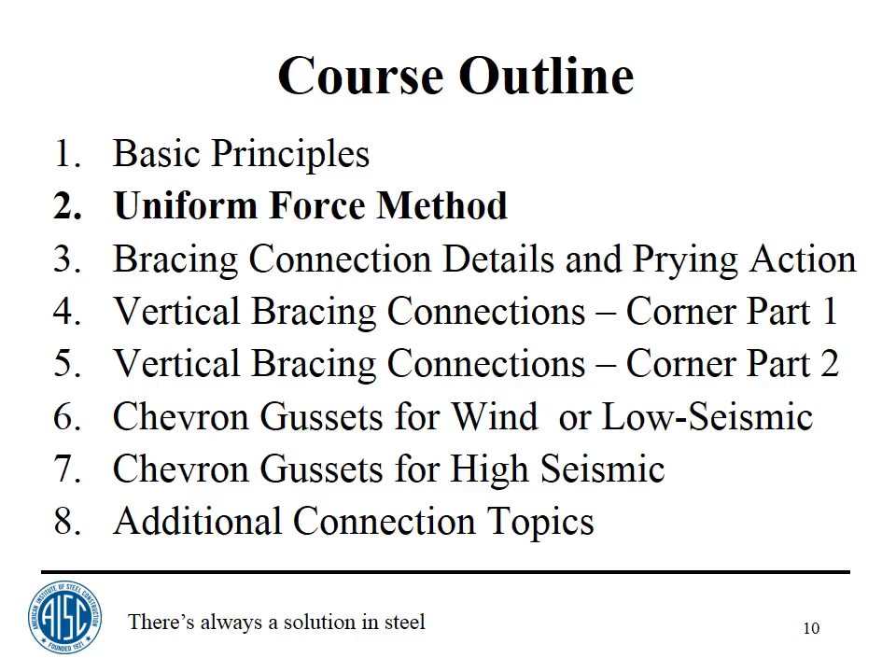In subsequent presentations we'll look at bracing connections and details. That's next week, or 2 weeks actually from tonight. Then we'll look at some corner connections, some non-seismic and seismic. Those will be sessions 4 and 5, and then chevron gussets for 6 and 7, non-seismic and seismic, and then we'll finish up with some additional topics. Some of them are probably still up in the air, but maybe development of fills and gussets coming down to base plates and that sort of thing.

Tonight's session will cover all of the items you see here: the uniform force method and all the things associated with it - the geometry, control points, admissible force field. We defined that last week, but we'll talk about it again. We'll do the beginning of a small example, which will also be done in session 4. We'll look at special cases 1, 2, and 3, and special case 4, which is a new one. The research basis for the uniform force method - depending on how much time we have, we'll get into an orthogonal development for the uniform force method and then do a couple more examples and a summary.

The uniform force method, what is it? It's a geometric method to determine the statically indeterminate force distribution in a vertical bracing connection. The method evolved from research sponsored by AISC, performed by Ralph Richard at the University of Arizona back in the mid-'80s.

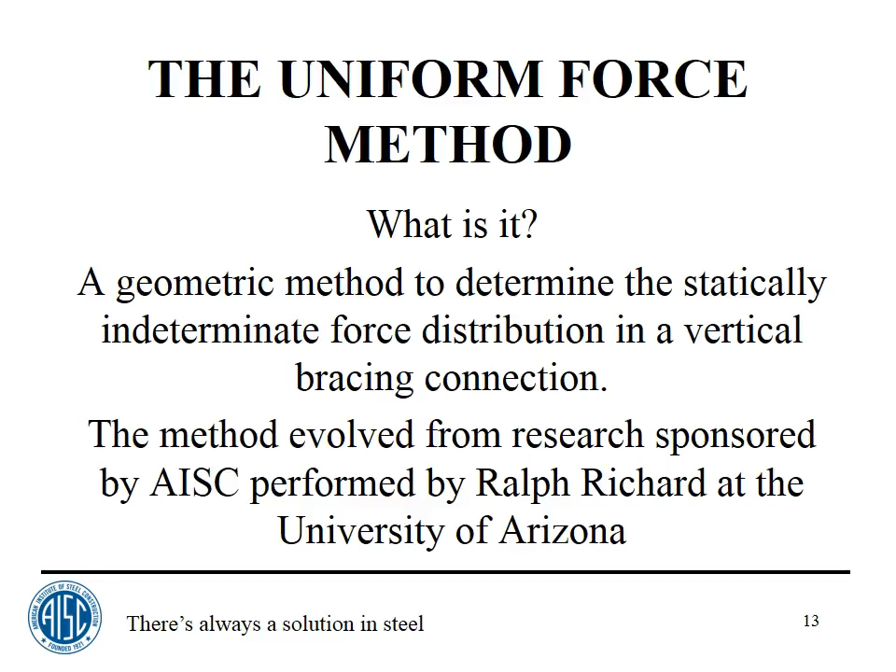And what about an admissible force field - an admissible force field is an internal force distribution in equilibrium with the applied forces. That's basically all it is. We need to do free body diagrams for all parts of our connection, just as we have to have them for all parts of our structure. The load path that actually develops is intimately associated with the admissible force field that you choose. Last week we saw admissible force fields that were generated by three methods that exist out in the industry today: the parallel force method, the KISS method, and the uniform force method.

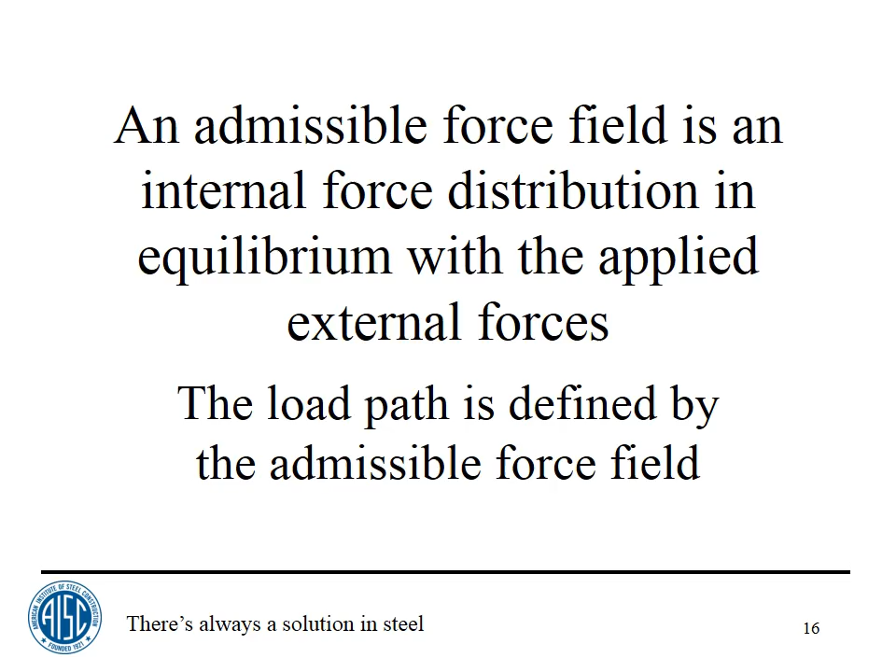Today, and for the rest of this webinar, we will be talking about only one of those three: the uniform force method. The control point geometry, which we'll discuss shortly, is dictated by the constraint.

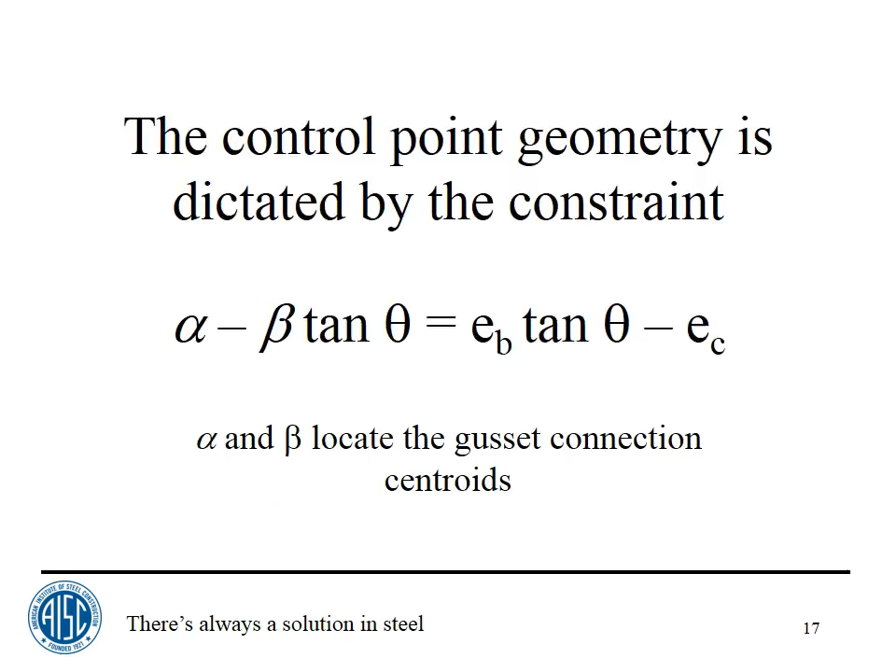Alpha minus beta tangent theta equals E sub B tangent theta minus E sub C. Alpha and beta locate the gusset connection centroids. Sometimes you'll see in some of these slides another set of quantities, alpha bar and beta bar.

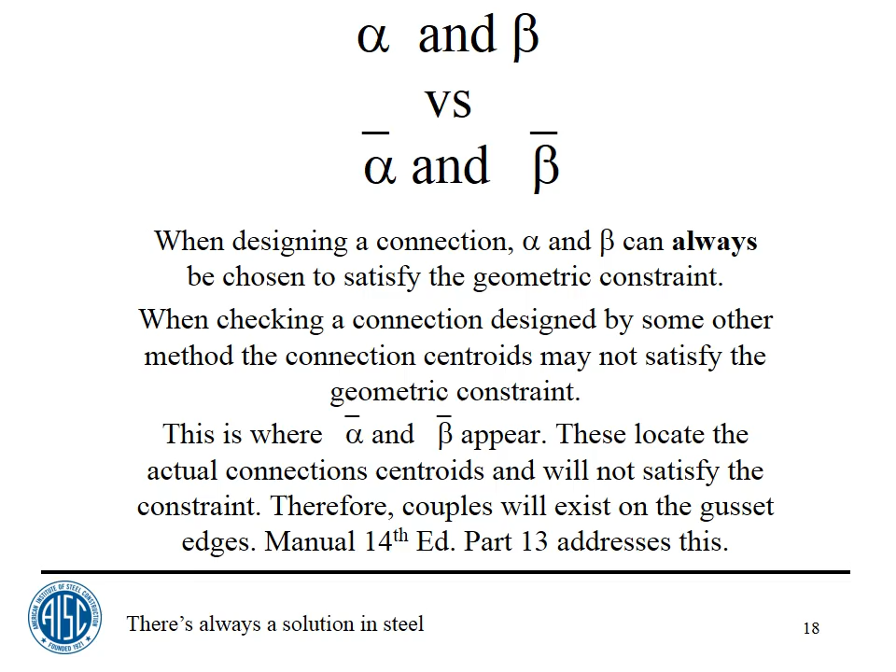When designing a connection, alpha and beta can always be chosen to satisfy the geometric constraint. When checking a connection designed by some other method, the connection centroids may not satisfy the geometric constraint, and this is where alpha bar and beta bar appear. These would be the actual connection centroids, and will not necessarily satisfy the constraint. If that happens, instead of having a nice concurrent or coincident set of forces on your gusset, you'll have some couples—all of the forces do not act at a single point unless you satisfy the constraint.

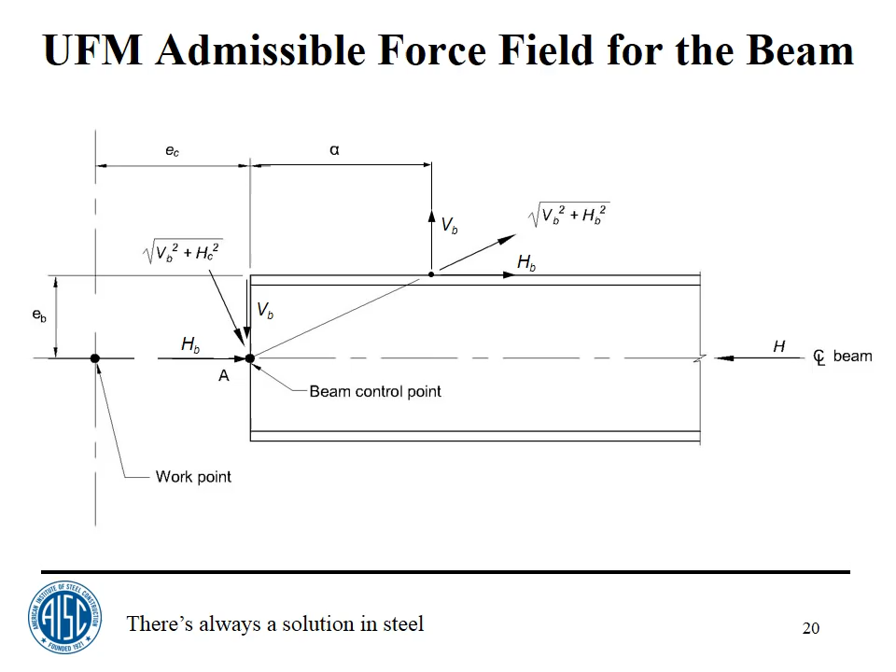These slides show the control points. Control point A is the beam control point. Control point B is the column control point. These are really fundamental to the development of the uniform force method.

These are the equations of those three straight lines. For equation 1, y equals 1 over the tangent of theta, times x. For the equation for the beam force line of action, it's y equals E sub b over alpha, which is its slope, times x, minus the y-intercept, which is E sub b over alpha, times E sub c. And the equation for the gusset to column force line of action: y equals beta over E sub c, which is a slope, times x, plus the y-intercept, which is E sub b. These are the three equations.

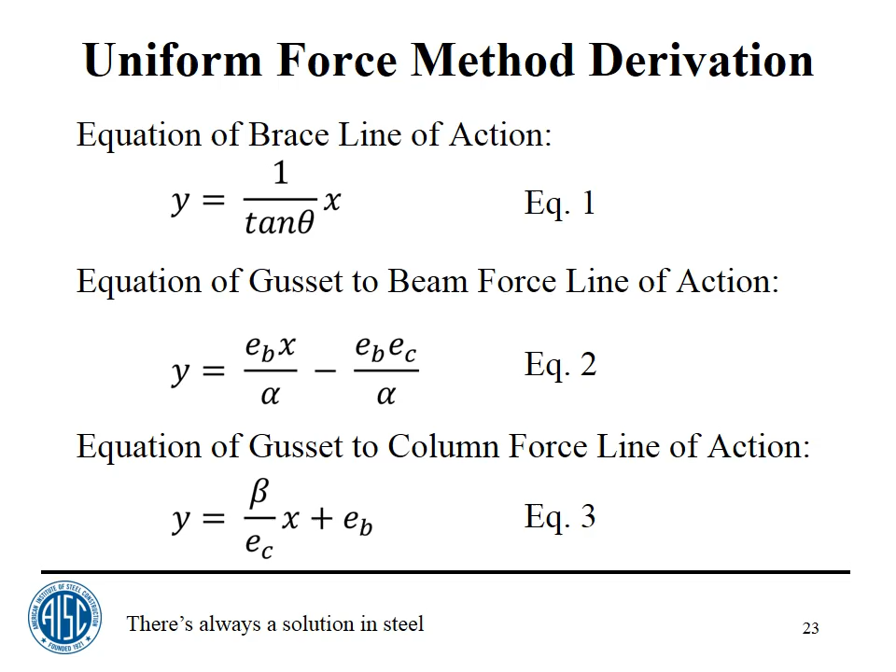If I take those three equations, 1, 2, and 3, and solve them to find point Q: take equation 1 and equation 2, set them equal, and solve for x sub q, that gives equation 4. Take equation 1 and set it equal to equation 3, and solve for x sub q, that gives equation 5. Now I've got two equations for x sub q, and x sub q given by these two equations must be equal.

So, setting equation 4 equal to equation 5, we get what you see on this slide. Simplifying that, you'll see a very familiar equation if you've used the uniform force method. The constraint comes out of the hat here: alpha minus beta tangent theta equals E sub b tangent theta minus E sub c. To satisfy the geometry of the uniform force method, the equality given by equation 6 must be satisfied.

I think this is the first time I've formally presented this derivation, but it was first done a long time ago in 1985 at the Ionosphere Club of Eastern Airlines, which has been out of business for a few years since. My flight was delayed, and I just couldn't stand not working on this problem. Finally I got something that worked that I could hang my hat on.

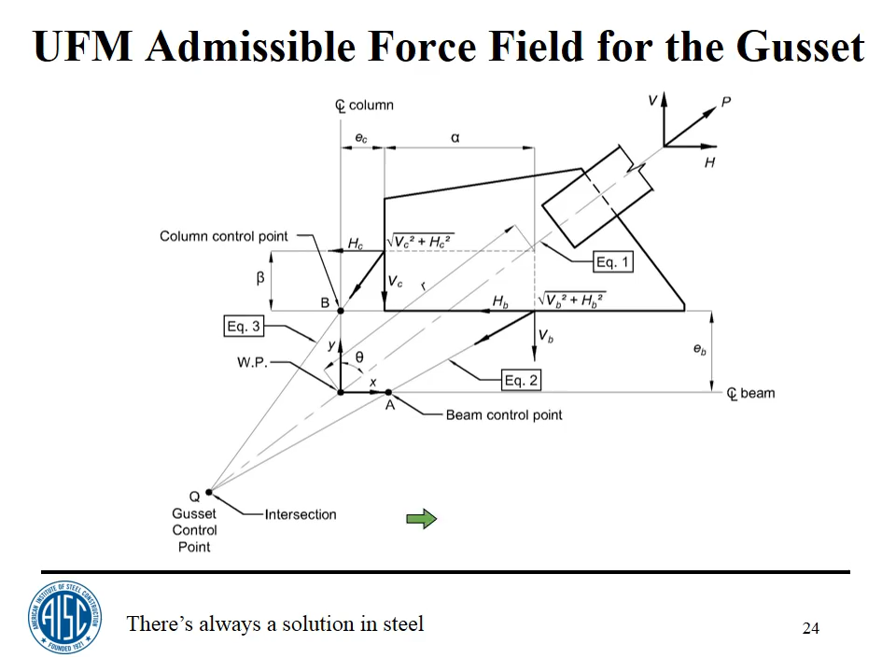The R here is a parameter I forgot to mention on an earlier slide, but it's a distance. Let's go back a couple of slides and show what R is. It's just a geometric parameter: the distance from the work point to the point where a vertical raised from the centroid of the gusset at alpha meets the horizontal projected from the centroid of the gusset column connection. Where they meet, the distance from that point to the working point is R. It's just the geometric part of the uniform force method, and using it makes the final equations pretty simple, as shown on this slide.

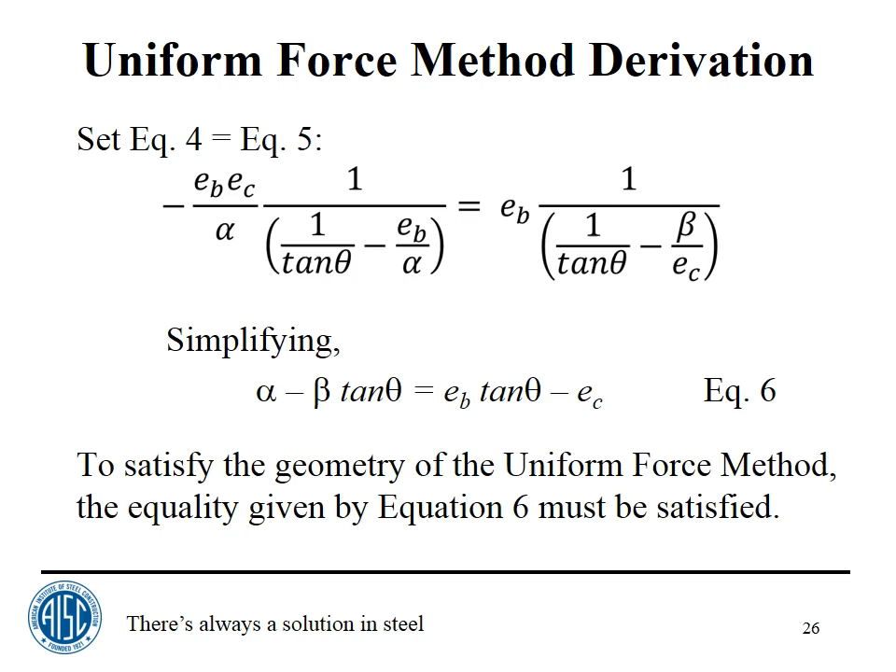This is some of the data. We're doing this to the 14th edition, and it's an ASD example. The beam to column and gusset to column connections have 4 rows of bolts. That's what the little n equals 4 means.

The length of the weld was taken as 20 inches with a 1/4 inch minimum fillet. In this case, we're using 3/4 inch diameter A325N bolts in standard holes, unless noted otherwise. And for double angles, we're using horizontal short slots.

Short slots transverse to the direction of the load. They're actually horizontal in the legs that connect to the column. The edge distance in the vertical direction is 1.25 inches minimum, and the bolt spacing is 3 inches.

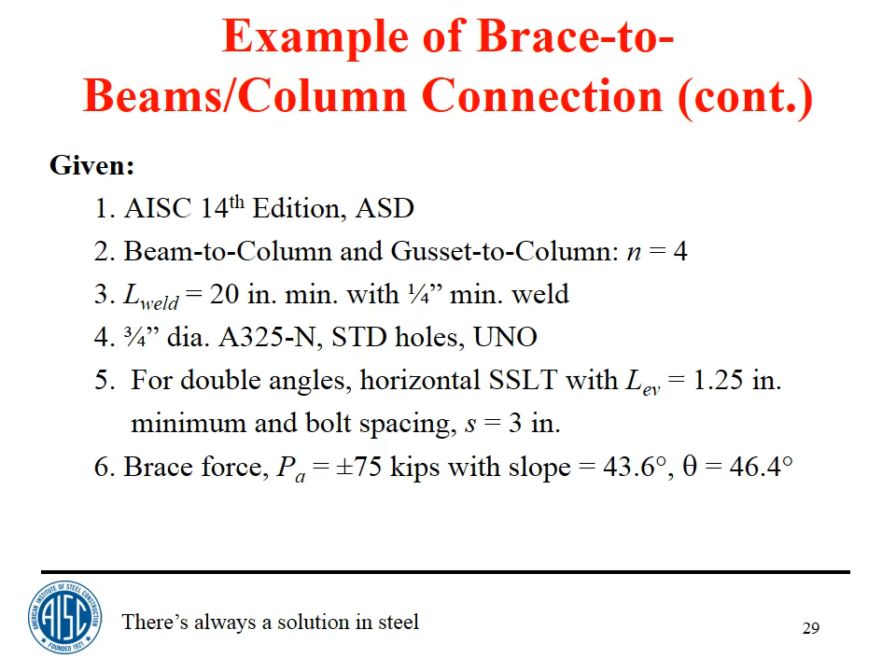So continuing with the parameters, you'd calculate tangent theta, which is the tangent of the angle, 46.4 degrees. E sub B is the half depth of the beam, 8.2. E sub C is the half depth of the column, 6.05. E sub C is equal to 0 for connections into column webs generally, except for this special case 4 that you'll see later on today.

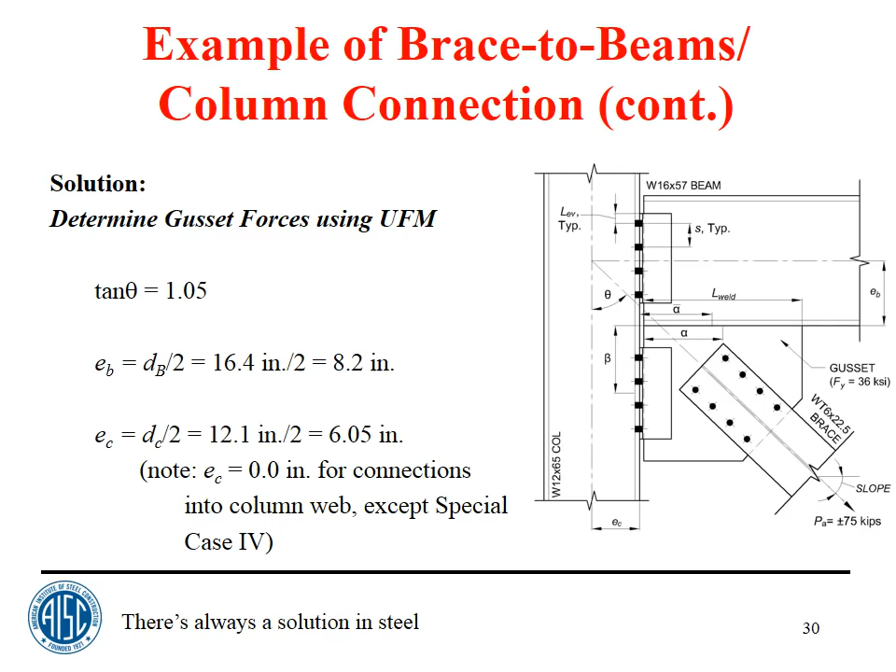Calculating from the geometric layout, the height of the gusset is about 16 7/8 inches. That's this distance here, and in this particular example, this clip angle was centered on that, which gives me a beta bar, more or less centered, equal to beta of 8.5 inches. That's 8.5 inches from the bottom flange of the beam to the centroid of the gusset to column connection. Alpha, then, we can calculate from the constraint.

Alpha equals E sub B tangent theta plus beta tangent theta minus E sub C. So it's 8.2 times 1.05, that's the tangent of theta, minus 6.05, which is E sub C, plus beta, which is 8.5 times tangent theta, 1.05, gives me 11.5.

Now you might say, well, why didn't we make alpha and alpha bar equal? We could have, but the reason it's not done here is just to show you how it works. Alpha bar, in this particular case, is half the length of the weld plus the setback. The length of the weld was given as 20 inches over 2, gives me 10, plus a half gives me 10.5.

Now alpha itself was 11.5. So all I really need to do is say, I don't want to use 20 inches for the weld here. How about if I use 22? If I use 22 inches, 22 over 2 is 11, plus 0.5 gives me exactly what alpha is, 11.5. It wasn't done in this case just to show you that you don't need to do it that way.

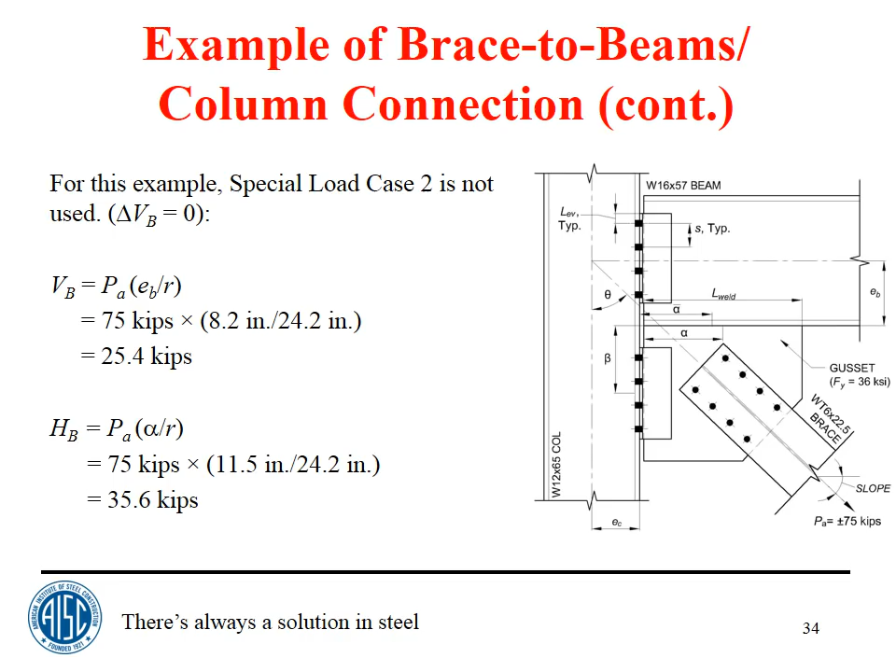If you do that, when you come to check the V sub B's and the addition of the V sub B's and V sub C's and the H sub C's and H sub B's, you won't get the cosine of 75 for the vertical and the sine of 75 for the horizontal. So you'll know right away that you've screwed up someplace.

So we've done all that. M sub C would be a couple on the horizontal edge, the vertical edge between the gusset and the column. But in this particular case, beta equals beta bar, so it will be 0. You could have couples on both edges.

And if you have a situation where the gusset is welded to both the beam and the column, how do you decide which one to pick? Which one should be beta? Should beta equal beta bar, or should alpha equal alpha bar? Really, there's no answer to that question.

Usually, we pick beta equal beta bar for the bolted connection because it's difficult to carry any couples or moments on bolted connections, especially with double clips like this, because you've got prying action and all that to deal with. Whereas the weld is really pretty benign relative to any couple on it, provided it isn't too big.

So usually, and I think it's pretty much universal, whenever you have a welded-bolted situation, you always pick the centroid of the bolted connection and set that equal to beta. That's therefore beta equals beta bar. And let alpha turn out to be what it needs to be to come up with reasonable geometry for your gusset.

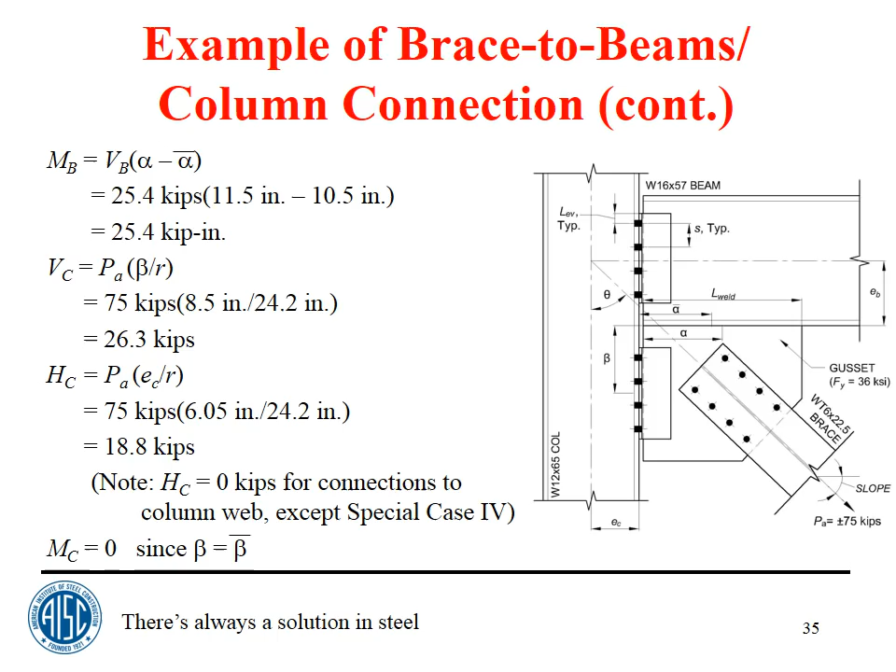Okay, and then I have a couple questions. I'm going to go back to slide 28. Okay, I've got it, Bill. I've got it there. All right, there we go.

Okay, a couple questions about combining welds and bolted connections. And the question is, does there need to be any adjustment made due to the fact that the gusset plate is welded to the flange of the beam, but we're bolted to the column?

I don't think so. The connection that's probably critical in that regard is the gusset-to-column connection and the beam-to-column connection. If one of those is bolted, the other one should be bolted too most of the time. There's no specific requirement for that in the specifications. You could argue that there is, but I don't think it really covers it exactly. In the seismic spec, there's an absolute requirement for certain kinds of bracing connections that you use bolted or welded. But the other one, the gusset to beam, I don't see why that has anything to do with it. There's no reason why the deformation, the strain that takes place in the gusset-to-column connection and that takes place in the beam-to-column connection, can't be essentially the same.

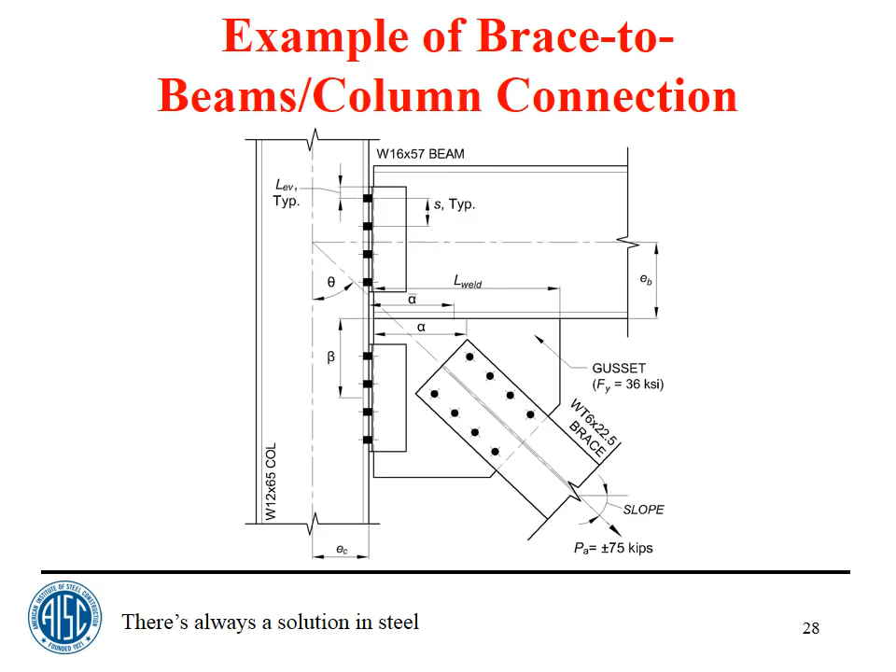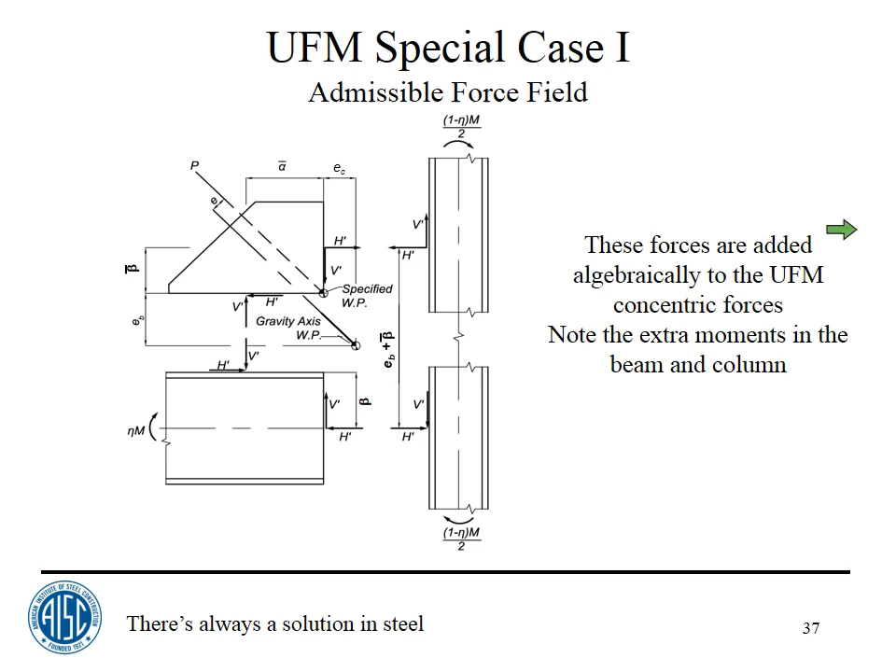So for this type of situation, we can come up with a statically admissible internal force distribution for the connection by taking the H primes and V primes shown here and adding them algebraically to the uniform force method forces you'd get by assuming the brace acts through the gravity line of action for the uniform force method. You come up with a completely admissible internal force field. However, you've got these couples in your beam and column, so the design of the beam and column need to consider those couples if you want to satisfy the niceties of structural mechanics.

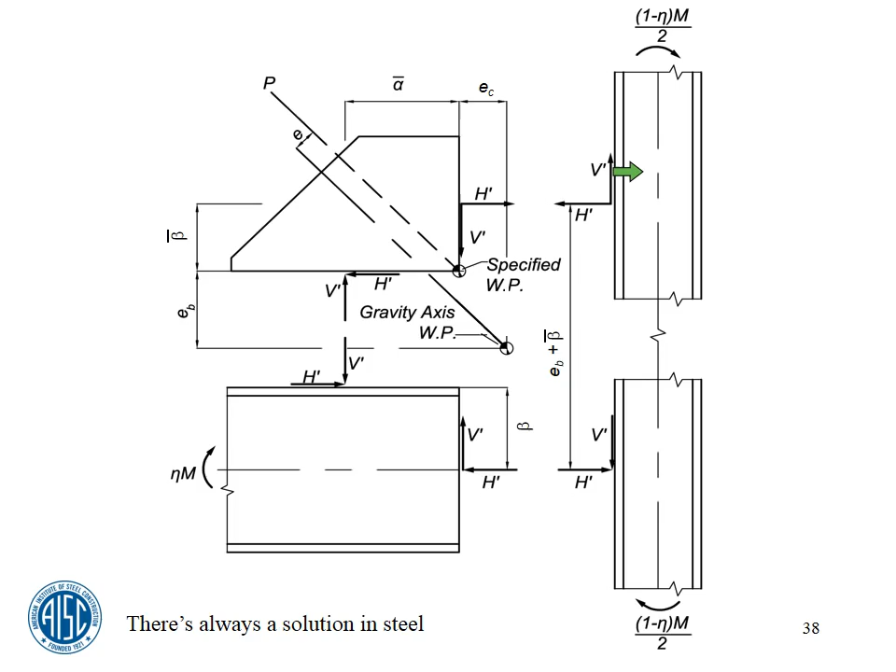You could check it and see whether it really makes any difference or not — sometimes it does, sometimes it doesn't. What's eta? These are the formulas to calculate H prime and V prime, basically gotten from statics, from the pictures you see here.

And eta — if you have an elastic analysis, it would be the I over L of the beam divided by the sum of the I over L's of the beam and the column. That's for elastic analysis, or maybe you want to do some sort of plastic analysis, looking at the plastic moment of the beam and the sum of the plastic moments. I don't know the right way to do this. If you're using an elastic analysis for your main frame design, I'd say the I over L approach is right. If you're doing an inelastic analysis of this particular problem, then maybe something like the plastic moment approach is more appropriate.

Special case 2, we alluded to that in the example that we saw. Sometimes we get too much shear in the beam. This R is a specified beam shear. And if R is taken as some percentage of UDL, what's UDL? The uniform design load. It's the design load that fully stresses this beam at the center under a uniform load.

A lot of people use this as a crutch rather than giving the connection design of the actual beam gravity shear. They might specify 1/2 UDL or 3/4 UDL or UDL at each end, say a composite situation. That really gets the shear stress in this beam web pretty darn close to what it can take.

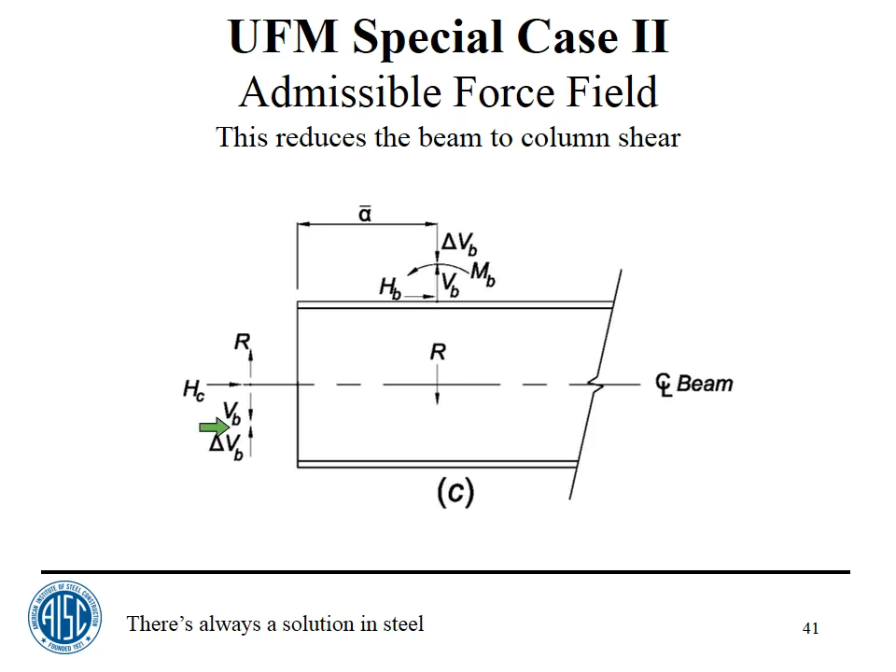If the gusset were down here on the bottom flange of this beam, say in the fourth quadrant, and the brace was in tension, then they would add. So even though they're shown this way, and they're shown this way intentionally just to show the way they really act, you can't be sure that they're always going to be acting in those directions.

This just shows you what happens if you do this. If we add a delta V sub B here, which we're reducing the vertical component between the gusset and the beam, we've got to increase the vertical component between the gusset and the column. So you have a delta V sub B over here that adds to V sub C. So V sub C gets bigger. And what happens now, we've got a delta V sub B here and a delta V sub B there.

These are causing a counterclockwise couple on the gusset, and it needs to be reacted by a clockwise couple, which is V sub B times, if the alpha and the alpha bar are the same, that term goes away. It's delta V sub B times alpha bar, the distance between the two delta V sub B's, one here at the centroid of the gusset to beam connection, and another one here at the centroid of the gusset to column connection. If alpha and alpha bar are not the same, then we have this extra term that you see here, V sub B times the quantity alpha minus alpha bar.

All of these equations are given in part 13 of the manual, the 13th or the 14th, or even all the way back to, I believe, the second edition, and definitely the third edition, LRFD.

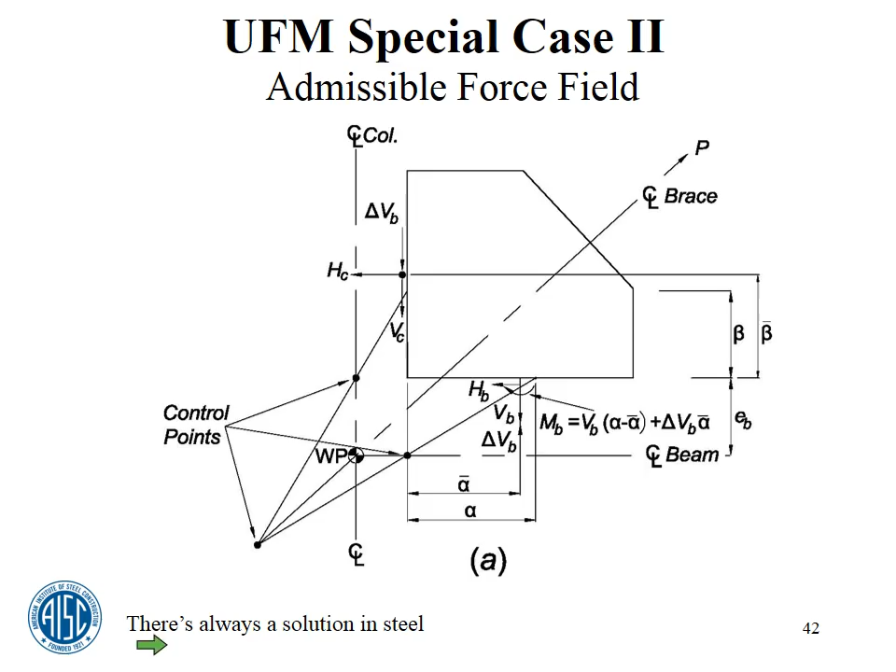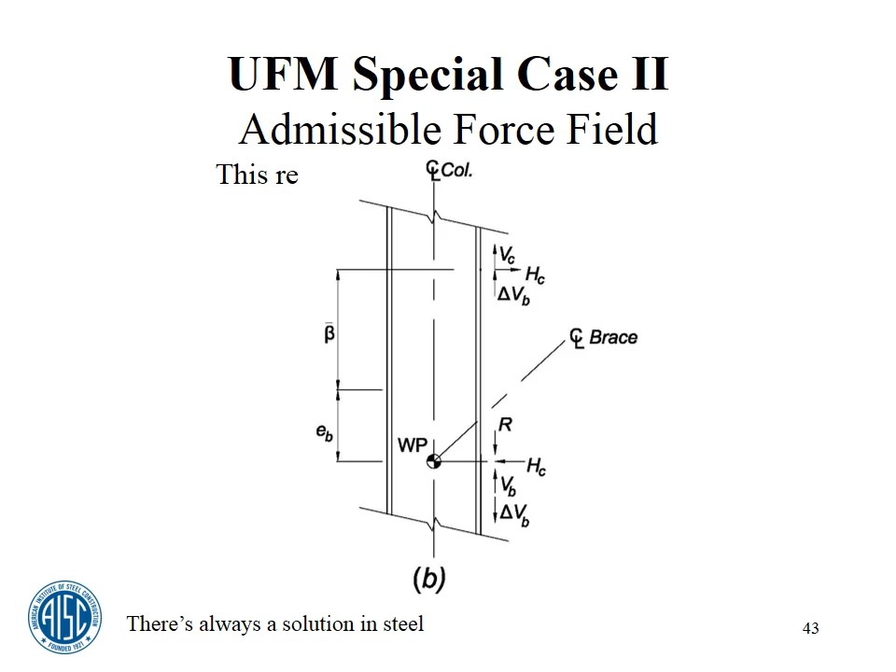So this just shows you what happens with the column. The third one of the three free body diagrams, we've got a delta V sub B that's pulling down here, and we've got another one that's pushing back up here. So these basically cancel each other out and have no effect whatsoever on the column. They do affect the gusset, though, and they affect the beam.

What causes the use of this? Well, I really told you what causes it. If you insist on using some percentage of the strength of the beam, some percentage of UDL, the uniform design load, you are going to be basing your shear reactions on a beam strength rather than on floor loads. Most beams, especially those part of the lateral bracing system, are designed for stiffness, not strength.

Check out your designs. Usually you're going to be designing these beams for at least a deflection limit, and you may have an axial force in it because of the bracing situation. These beams are going to be heavier than they need to be just to carry the gravity loads on the floor. This results in beams many times stronger than those required for strength, and larger shear reactions than those required for floor loads. Check one of your designs.

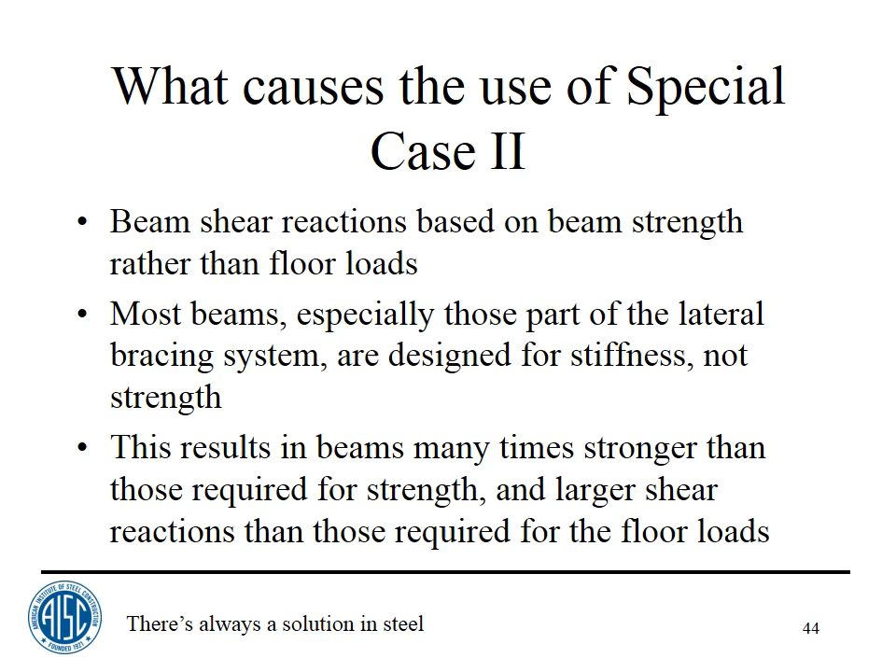Engineers listening to this, if you use UDL or 3/4 UDL or whatever, calculate the load you actually are using in pounds per square foot on the tributary area that contributes to that beam, and I bet you'd be surprised. You're probably talking about 1,000, 2,000 pounds per square foot, when the real load is probably more like 200. If the real gravity loads were used based on the loads rather than the beam strength, we probably would never have to use special case 2. And I don't really like special case 2, but sometimes we have to do it to avoid doubler plates, which are expensive.

Special case 3 is spelled out in manual part 13. Basically, it's what you would do if you got a very shallow brace or a very steep brace. This shows a shallow brace with a large angle theta from the vertical. Why connect to the beam and the column? Just connect to the beam in this case. And if you had a very steep brace, connect to the column. That's really all special case 3 is.

These are all the formulas. You can look this up in manual part 13. This blows up what you saw before. In the previous one, you could use a flat bar in here, which means very little fabrication, depending on if you can make it work. If you've got a big nose over here, it might turn out that you're not passing too close to the centroid of this thing.

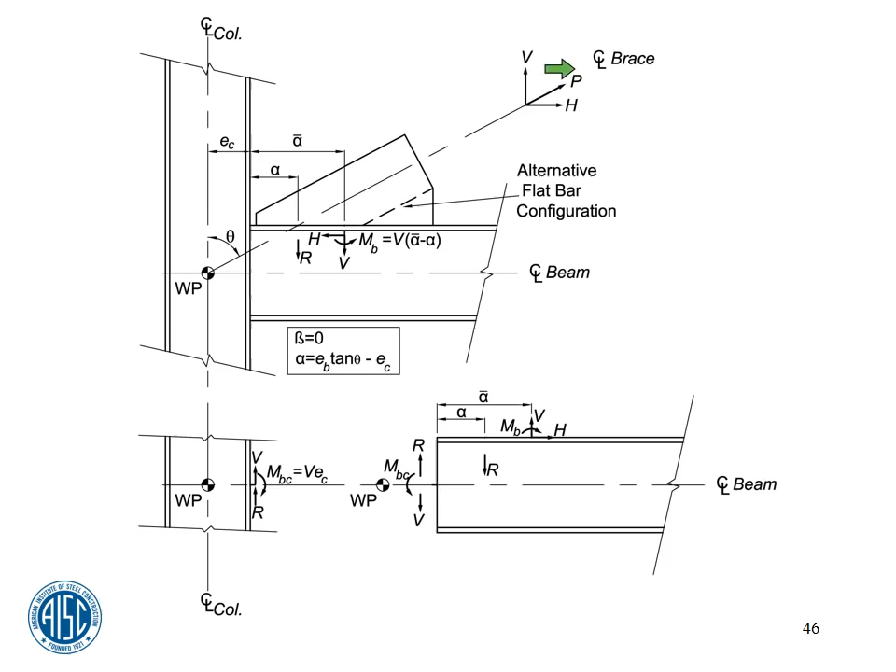Ideally, we should have alpha bar equal to alpha, but because of the geometry, you won't always do that. Note that one of the problems with this connection is MBC here. There's always going to be a moment between your beam and your column if you do this. That means this connection down here is going to be hurt quite a bit by a couple. There's nothing you can do about it, because I need to bring the vertical component over to the center of the column, and that's really what this couple is doing.

Now, special case 4, which the next set of slides will cover. This is something new. The name was actually coined just a few days ago by one of the people helping AISC produce the slides for this presentation. Basically what it does is it takes a connection to a column web but makes it look like it's to a column flange.

By taking an E sub C equal to the distance out, say, to the first column of bolts as the usual case. I could take it out to the second, or if I had a double column of bolts, I could go to the center of those. The idea is that the uniform force method, the mathematics, doesn't know whether this is a column web or a column flange, so we could kind of fake it out. We can just use E sub C, giving E sub C equal to the distance out to the first column of bolts rather than 0. It's turned out in a lot of jobs that gives us a much more economical connection.

This slide just shows you all the forces that you're going to generate using the usual uniform force method with an E sub B and an E sub C. You might take beta equal to the distance down to the centroid of the gusset-to-column connection. If you do that, and that's what we usually do, you're going to calculate an alpha, and it almost always turns out to be bigger than alpha bar. So you're going to have a couple on this horizontal edge here. We could move this brace out, we could make the gusset longer, but why bother? It's just more economical generally to allow a couple to exist on these interfaces sometimes.

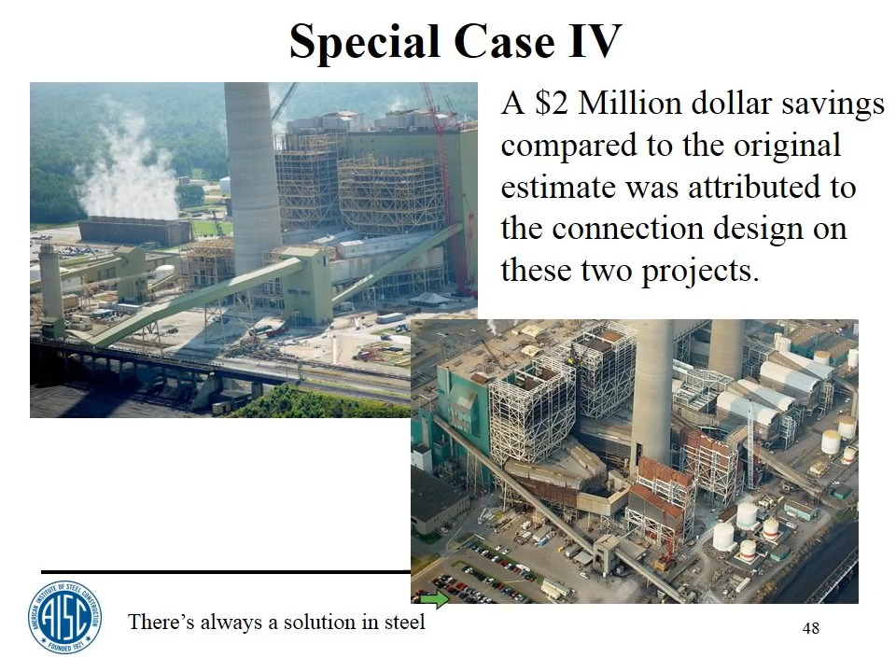They used the KISS method. They used double clips. We used the uniform force method, and Special Case 4, among other things. We used conventional and extended tabs. They replaced the more traditional double clips at jumbo columns, reducing both fabrication and erection costs.

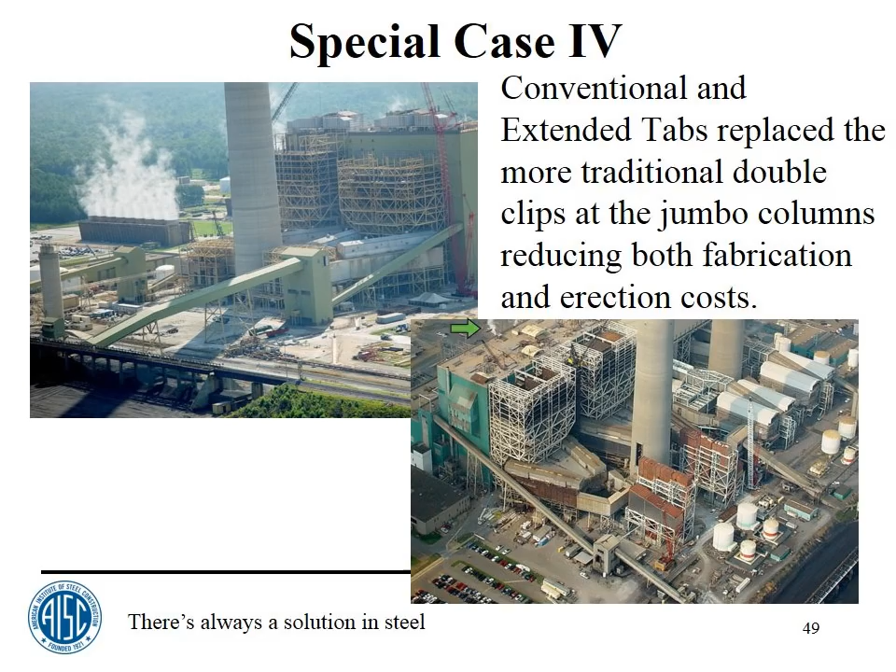Imagine drilling all those holes in columns that have 4-inch flanges. I mentioned that last week, too. So I'm not going to dwell on this too much.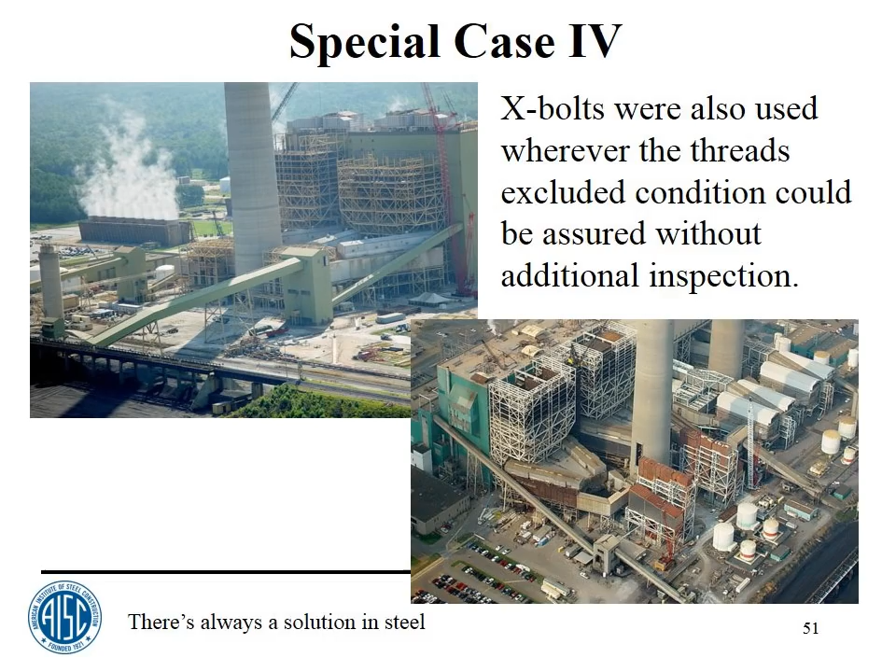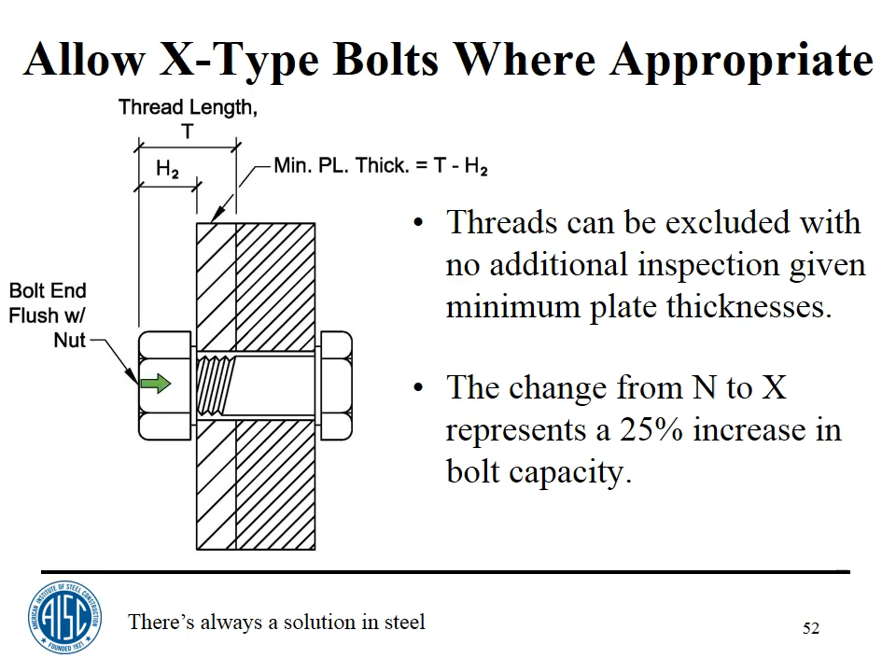But the uniform force method was used in novel ways. Basically, what we did is we used Special Case 4, and we used X bolts. A lot of people think that if you're going to use X bolts, you need additional inspection. But really, if the thickness of the ply adjacent to the nut satisfies certain requirements, as we'll see on the next slide, you may not need any extra inspection.

For instance, with 1-inch diameter bolts, if we have a flush nut, which is the minimum, and no washer, we'd need a ply next to the nut of about 5/8 to 7/8 of an inch. Probably 13/16 or something. But if I use a 5/32 washer, I can go down to about 5/8. And with a 1/4-inch stick through, I can go all the way down to about 3/8. So anything thicker than that, I won't have threads in the shear plane.

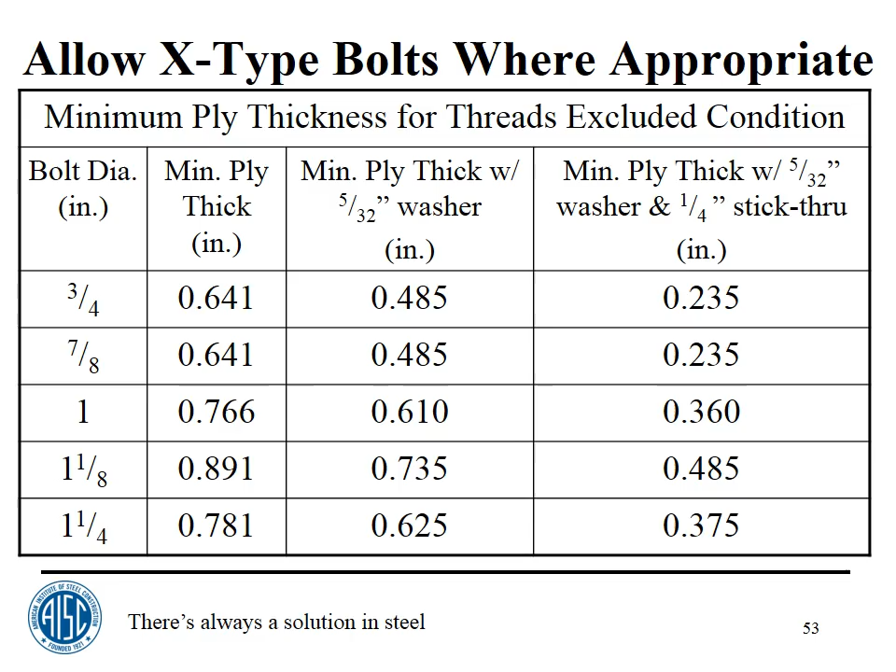So you can really use X bolts in a lot of cases, and we use them all over the place. If we have a connection to a column web, like you see here, or a thin web or thin plate, we use N-type because we don't want the extra inspection.

On this particular job, this is the Special Case 4 connection that was actually pulled off that power plant job you saw. We had a 16 by 26 beam, 3/4-inch diameter A325 bolts, and this is the actual design. And these are the force distributions.

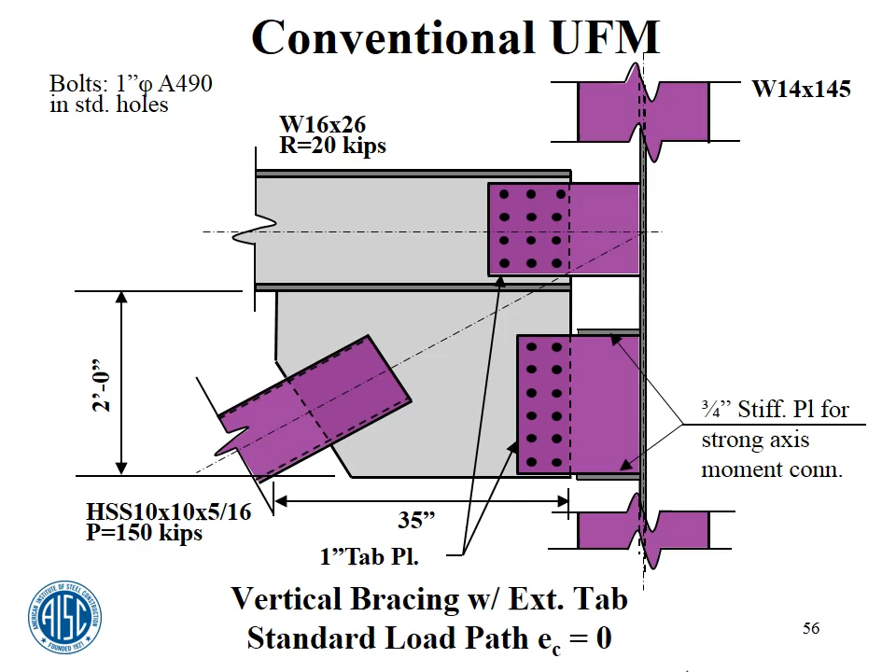We saw that before. This is using E sub C equals 10 1/4 inches. The conventional way to do this would be to use E sub C equals 0, and if you do that, you'll get this design. The next slide I'm going to dwell on a little bit more.

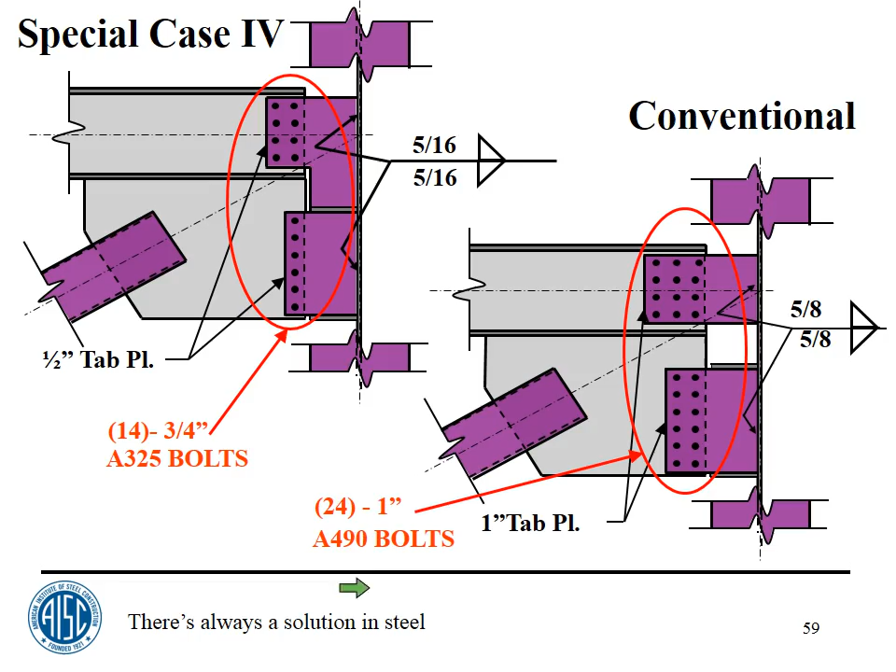We compared these two last week, the 1/2-inch tab and the 1-inch tab, and we compared the welds, 5/16 to 5/8, and we compared the bolts, 3/4 over here and 1 inch, but I think that's a mistake—those probably should be 7/8 bolts. But anyway, I don't want to dwell on that anymore.

These are the forces. If you calculate the forces on this—another homework problem for you—if you take the geometry you saw and go through the whole process, you should get the forces you see on this slide. This is what we used to design the one you saw with E sub C equals 10 1/4.

So I want to go through this table a bit more. We kind of glossed over it last time, but look at the holes. We got 24 in the standard as opposed to 14. We have plate thicknesses of 1 inch as opposed to 1/2 inch. The area of the holes here is for 7/8 diameter bolts as opposed to 3/4-inch bolts. We had 14.4 cubic inches as opposed to 3. We've got 21% of the volume. That means we're drilling only 21% of what we would have had to do.

The next one is instructive. For the standard case, we had 5/8 fillets; for the optimum, 5/16. The length of the standard was 30 inches as opposed to 52.3. Yet when we come over here, we see 180 inches. How come we had 30 and now we've got 180? Whereas for the 5/16, we've got 52.3 and we still have 52.3.

Well, the reason is that a 5/8 fillet weld is a 6-pass fillet weld. So if you take 30 times 6, you have the equivalent of 180 inches of single-pass weld, as opposed to the 5/16 at 52.3, which is a single-pass weld.

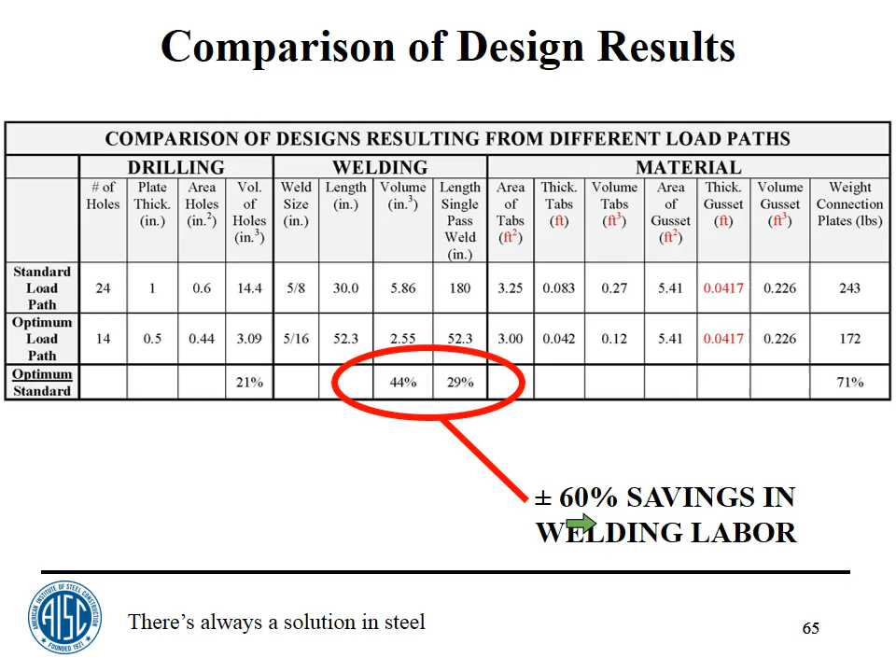Just looking at these numbers, we saved 80% in drilling time, and even more than that on the jumbo columns, because we use these tabs on jumbos as well as the light one you see here. We had about a 50% savings in welding consumables - I think it's actually more than that, but that was a reasonable estimate. And a 60% savings in labor - if you look at that 29, maybe we're talking about 70% instead of 60%.

And coming over here to the weight, it only weighs about 71% of what you would have had in the standard way of doing this.

You've seen 4 different cases here - actually you've seen 5. You've seen the general uniform force method, which is not one of the special cases. There's no special case 1, 2, 3, or 4 involved in that. So there's really 5 different cases that we've looked at.

So we've looked at how to use it. In the subsequent seminars, we'll look at design of a whole bunch of connections with this, or at least 2 in great detail anyway.

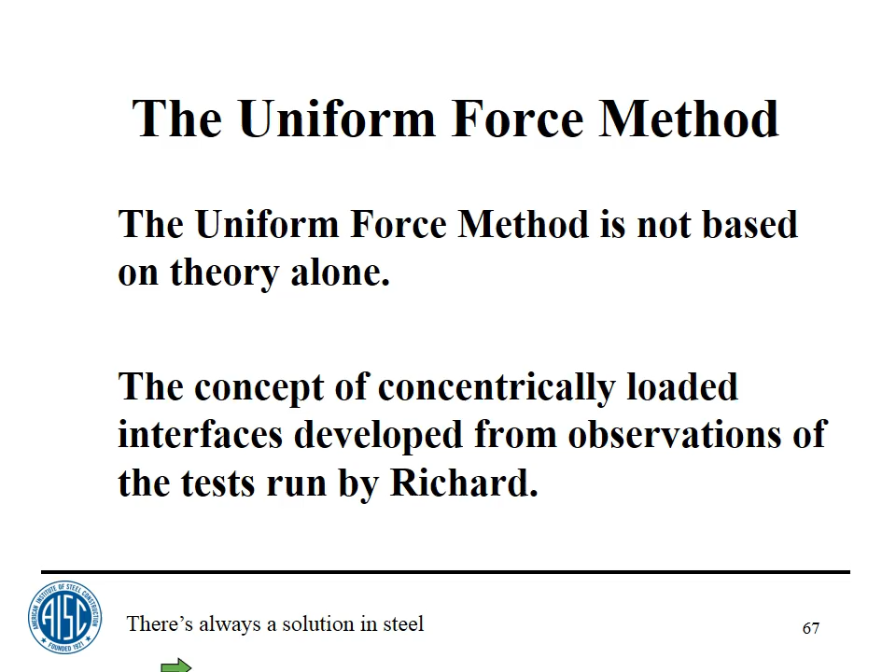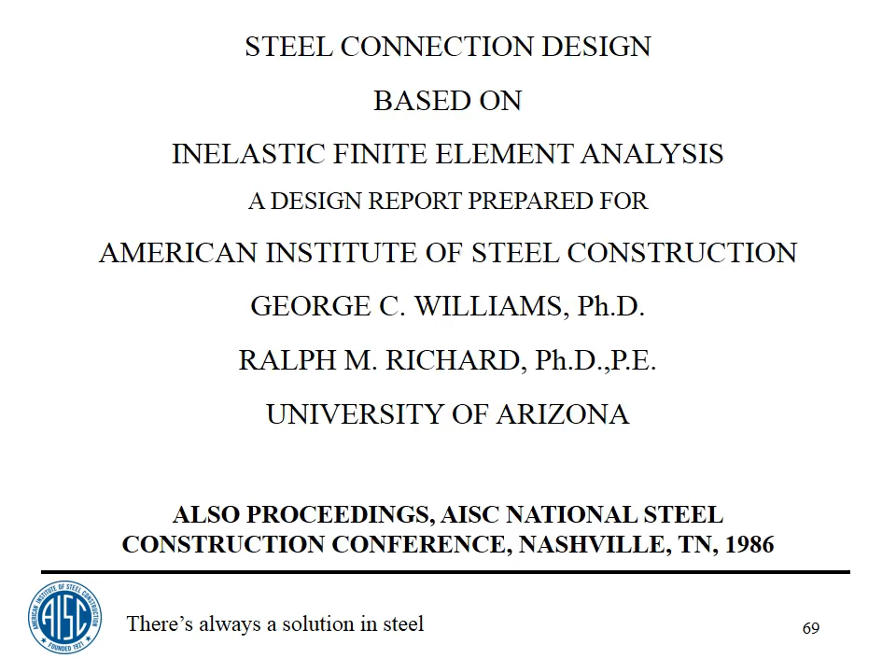The uniform force method, though, is not based on theory alone. It comes from work done by Ralph Richard, which was analytical, and it's also based on physical testing. This work by Ralph was analytical - he basically was using a nonlinear finite element program to solve problems that look like this.

You can go back to the paper I referenced on a previous slide, but he ran about 6 different cases. We started out looking at this with, say, welded on the horizontal edge and bolted on the vertical edge. Then we looked at bolted on this edge and welded on that edge. And then we looked at welded on both sides and bolted on both sides, and we didn't see a heck of a lot of difference. That's 4 cases right there.

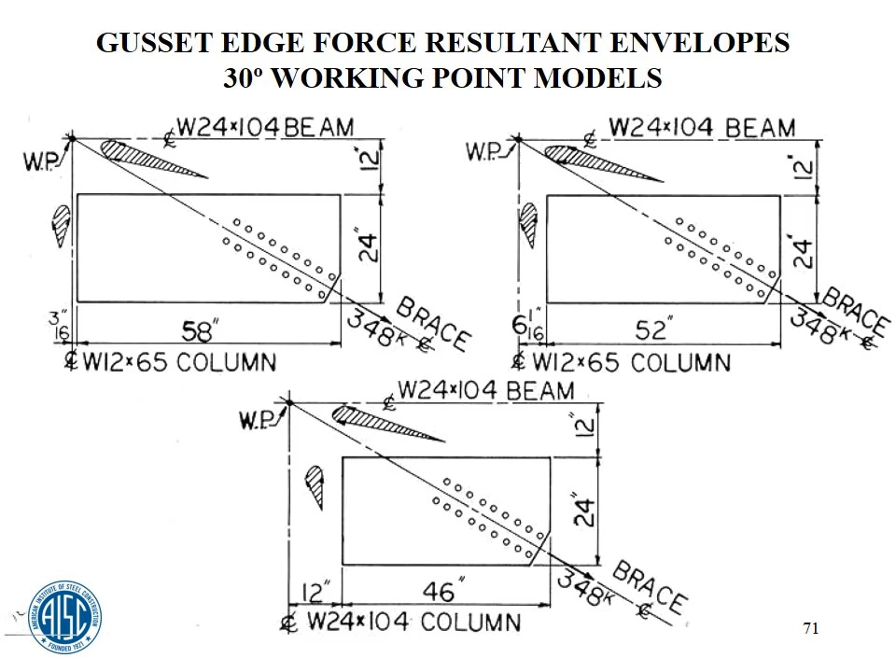Some of them really look pretty good, some not so good, but if you go back looking at the 45, they all looked pretty good at that one. Go back to this one, they all look pretty good. That gave me the idea, really, that maybe I can come up with some analytical way of representing this.

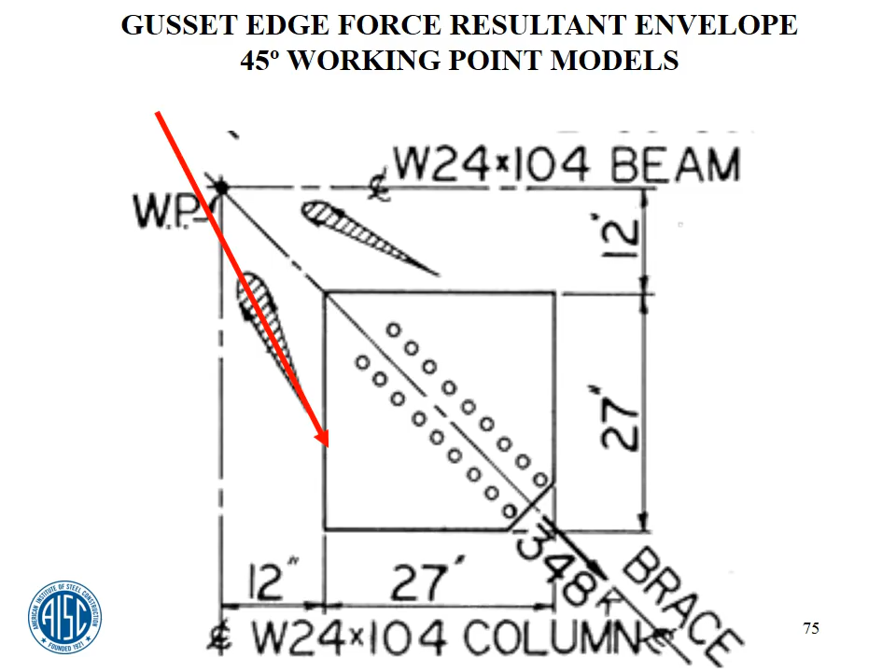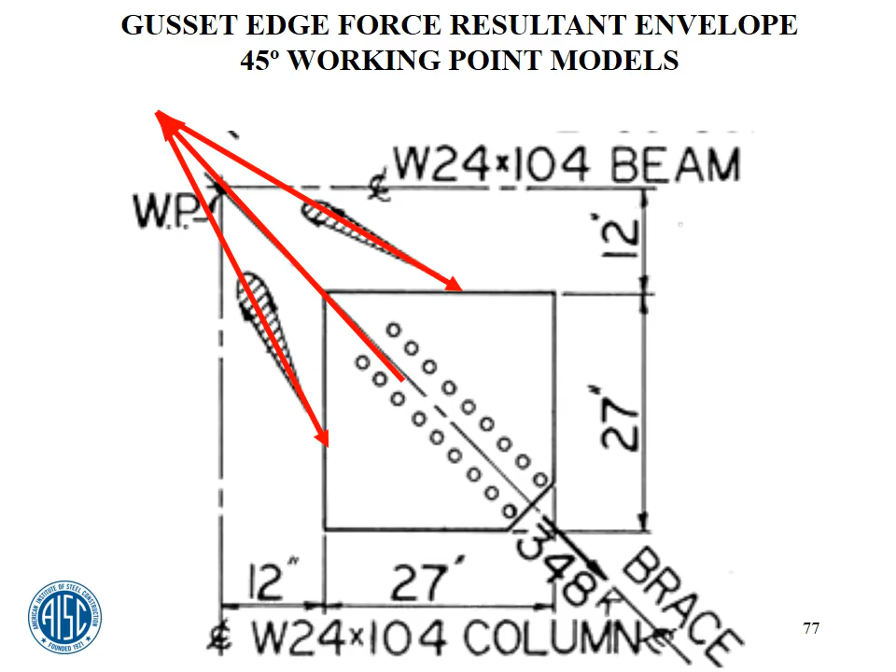Just looking at a 45-degree case, what if we extended, what if we put arrows through these teardrop-shaped regions that you see that go more or less to the center of the gusset, and you see they intersect each other on the opposite side of the gusset from the work point. That was the genesis of this idea, that I tried to come up with a kind of a non-fuzzy way to represent this.

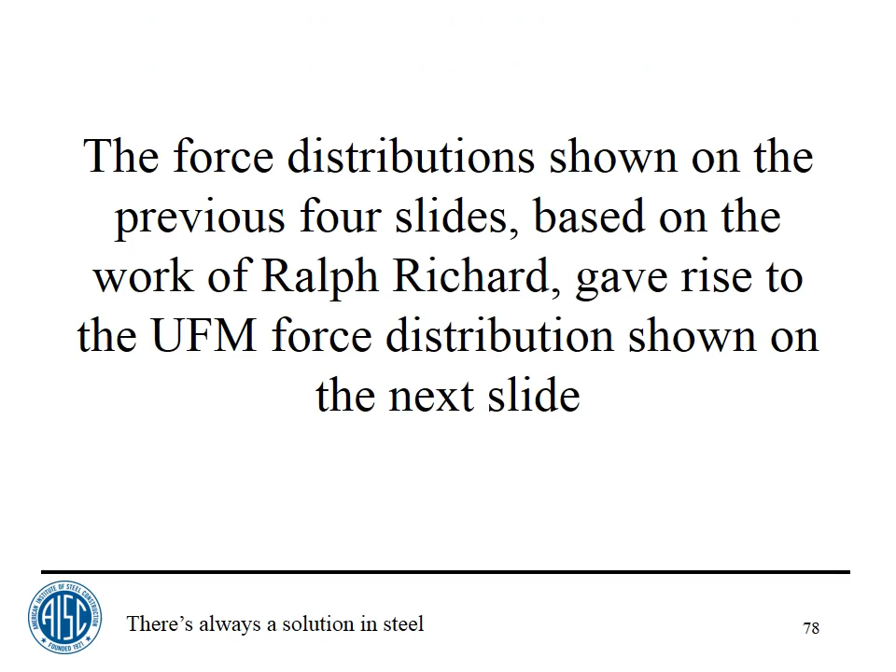So I say the force distribution shown on the previous 4 slides, based on the work of Ralph Richard, gave rise to the idea of a concentric, coincident, or concurrent set of forces on the gusset, which you see here. You can see exactly in an analytical fashion what Ralph was showing in all of these pictures he had here, or most of them anyway. I agree they're not all exactly as nice as that, but it's still pretty darn good, pretty close to what he came up with.

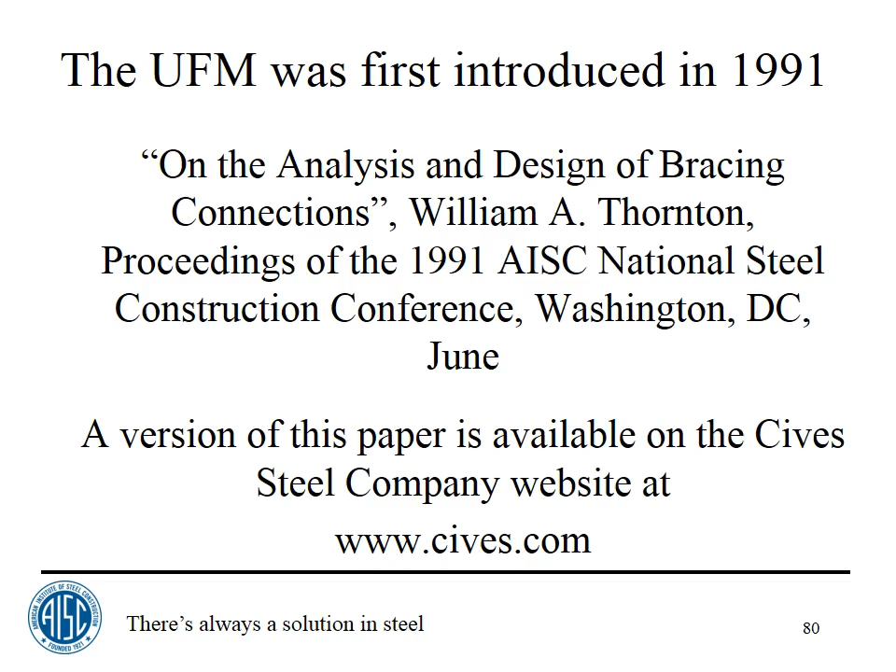In addition to this analytical work, I wrote a paper in 1991 that was published in the conference proceedings of the AISC National Steel Construction Conference in 1991. A version of this is available on the Cives website. And this is my T.R. Higgins paper from 1995.

We compared 6 more or less full-scale connections, 3 of them by Reidar Bjorhovde and a graduate student at the time, Chakrabarti. These were done at the University of Alberta.

These were tension only. This would really not be a good connection for compression, but these were tension only. There are 4 different connections listed here, A, B, C, and D: brace to gusset, gusset to beam, gusset to column, and beam to column. Keep those 4 letters in mind.

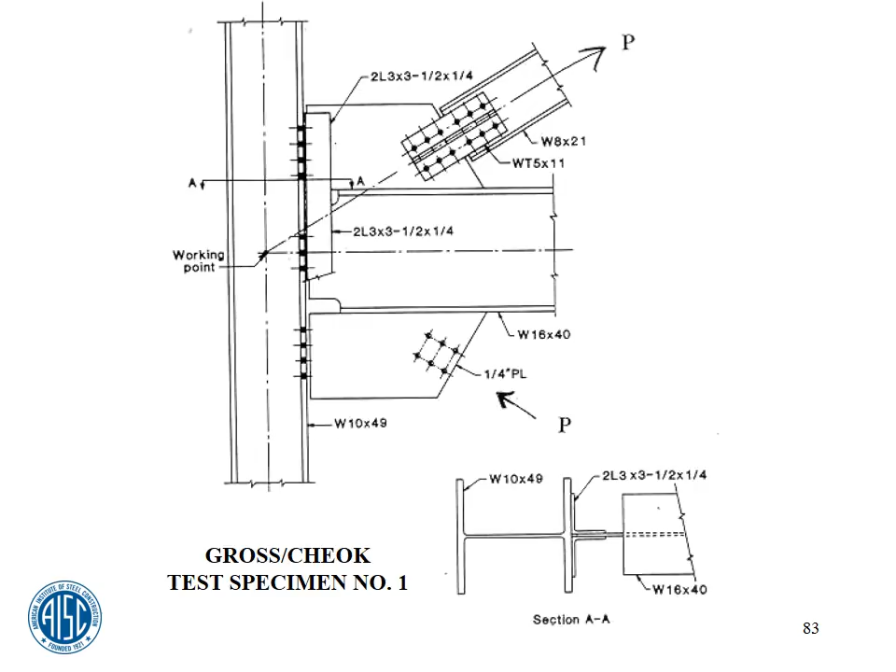These were 3 tests done by John Gross and his assistant Geraldine Cheok at NIST about 1989. Looking at these slides, this lists all the limit states—I'm not going to go through these in great detail, but there was an even dozen. You can see bolt fracture, Whitmore buckling, Whitmore yield, bearing, tear out. Even back in those days, we distinguished between tear out and bearing, even though the spec still does not.

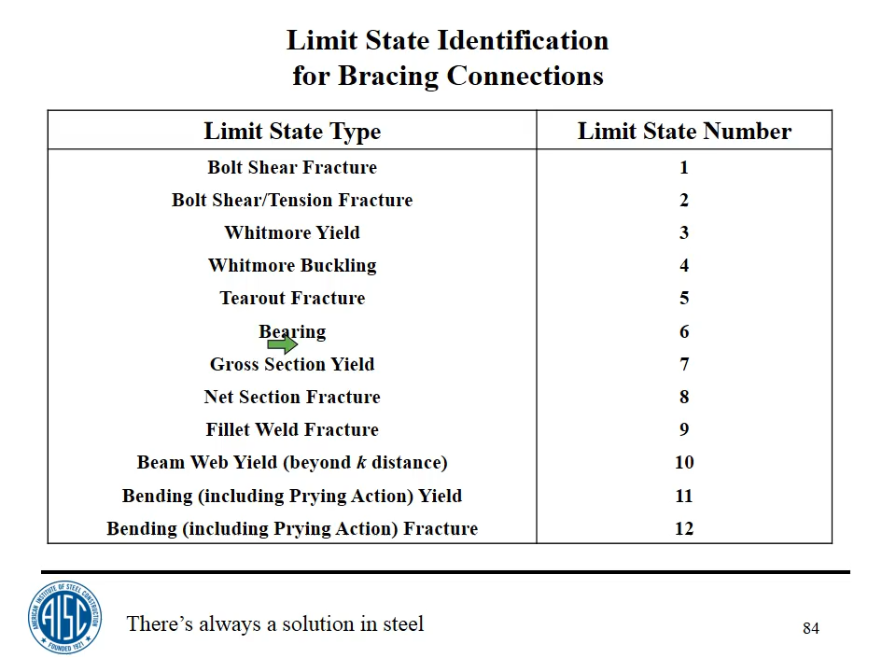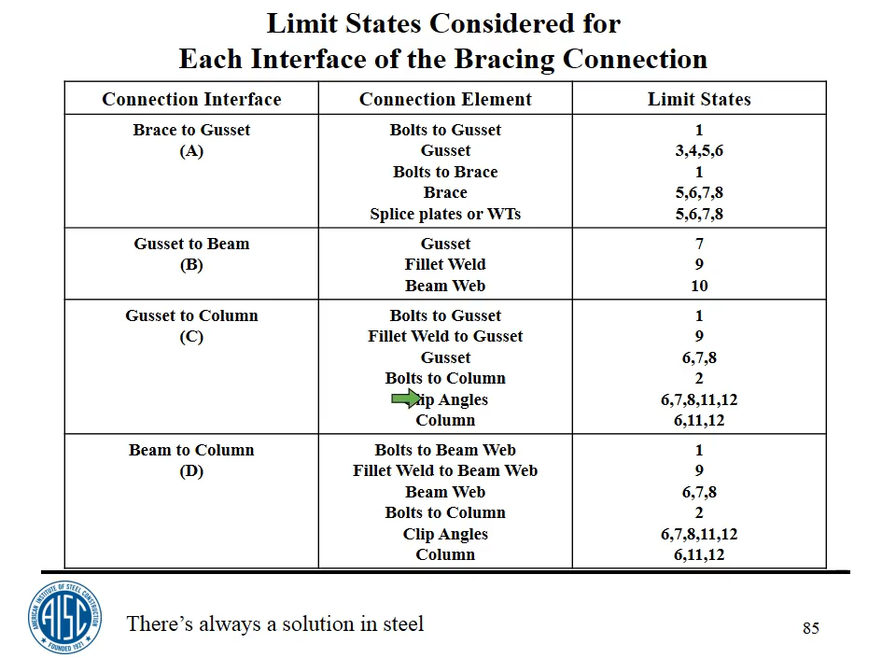Looking at the 4 connections, A, B, C, and D, these are the limit states that apply to them. You can look at this at your leisure. You've got all this information, and then here are the physical test results.

The first 3 were the Bjorhovde tests, and just looking at test capacity versus predicted capacity, we're right on the money. 1.01—this number should be just a little bit bigger than 1. 1.01, 1.04, 1.11, and even the failure interface was A, the predicted and the test was A. This one wasn't the same interface, but we had one of the same limit states, 5.

When we got to the second 3, these include frame action, which is not explicitly or even implicitly included in the uniform force method, so they turn out to be conservative. I've always felt that if we could figure out a way to consider frame action in these connections, we could do a lot better than we're doing in the design of these connections.

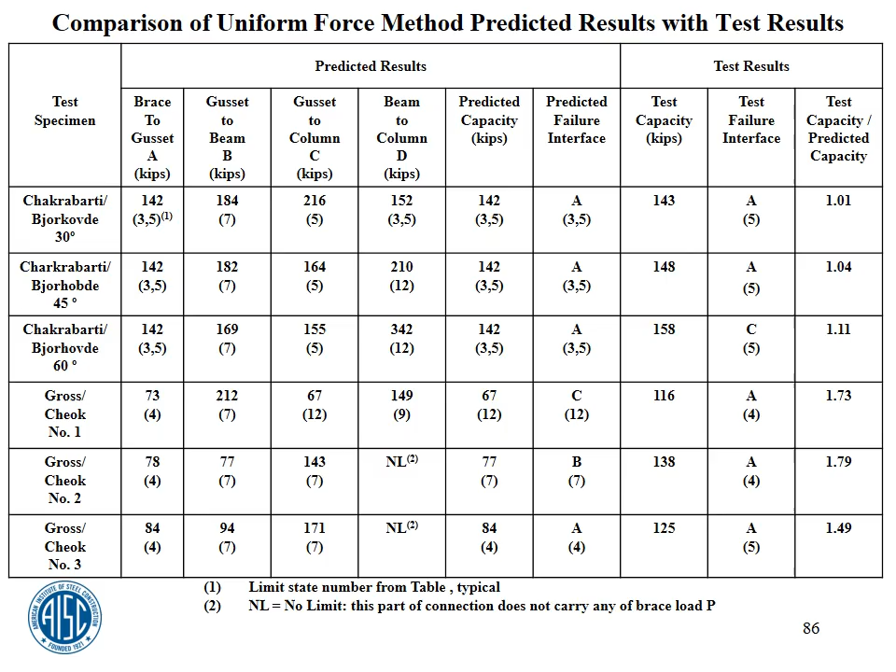There was a paper that myself and Pat Fortney, my colleague at Cives, presented in Toronto—a first step maybe in trying to come up with an analytical way of doing this. I wouldn't say it was 100% successful, but you can take a look at that paper. It's probably available from AISC. It's called The Effect of Frame Action on Vertical Bracing Connections.

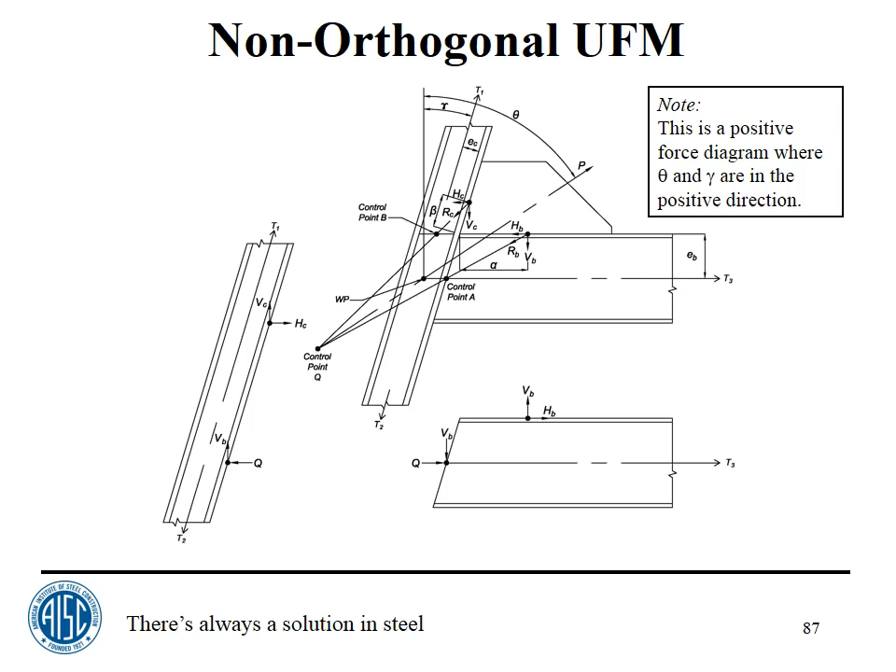Okay, I think we're getting close to time, and Brent asked me to maybe skip this. If you have a non-orthogonal situation, we can generalize the uniform force method as seen in these slides. These formulas are presented all the way back in 1999 in a book edited by a guy named Akbar Tamboli.

There's a reference to the 2nd edition of that book in the references to this presentation, and you can find all these equations derived or given there. I don't actually derive them—I show you what they are. It's up to you to derive them.

To derive them, you would have to go through the rigmarole that I did with the 3 equations, equation 1, 2, and 3, and show that you can make all of the forces intersect at a single point. This formula right here is the constraint in the non-orthogonal case.

There's an example worked out in detail in the forthcoming design guide. I will not go through that here in detail because we're running out of time, but all of the slides for this are shown here. You can calculate all the forces and check it out for yourself.

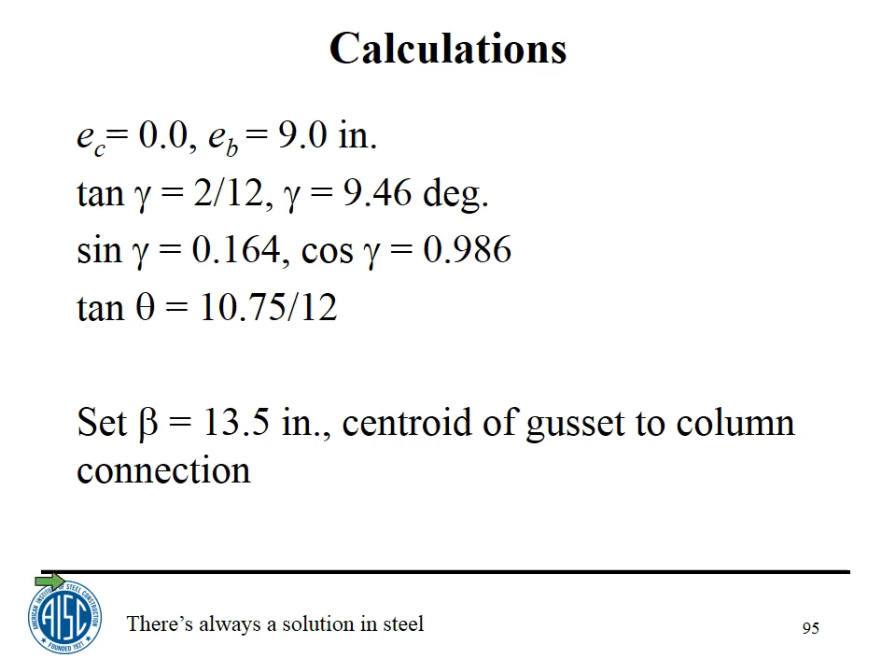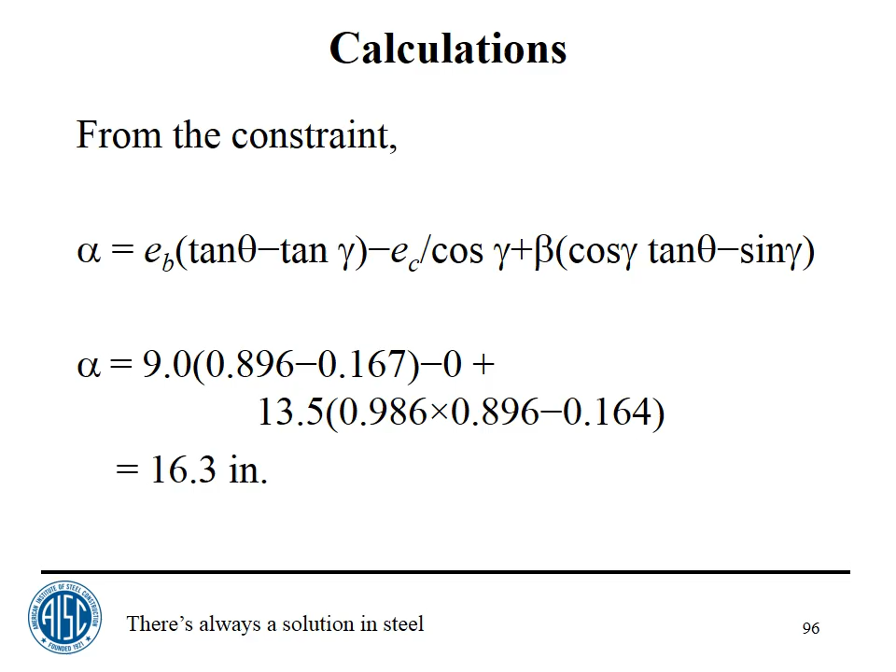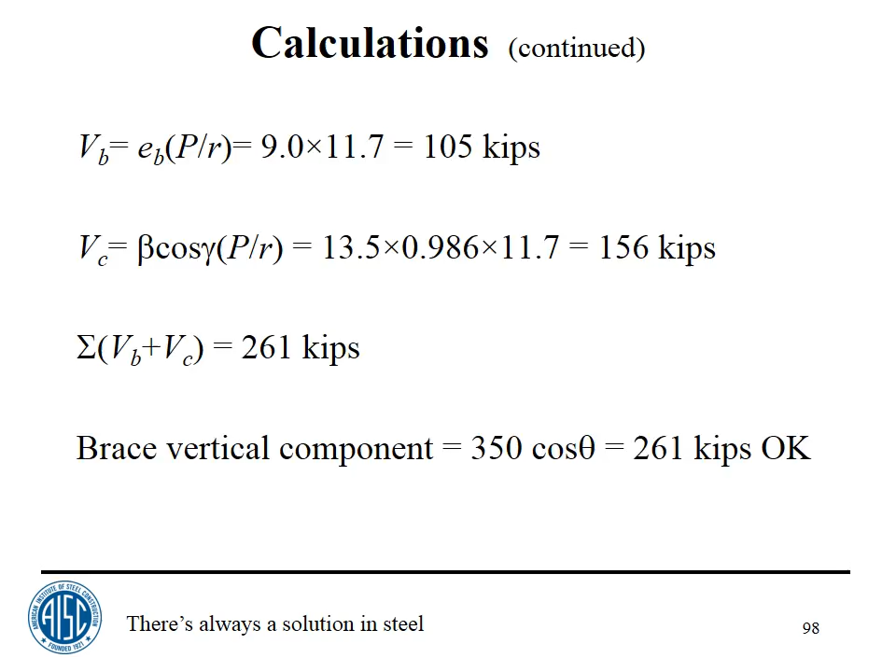I want to make the point that you should not, in a non-orthogonal case, assume that it's orthogonal. Maybe if you have an angle of like half a degree, yeah. But in this case, the angle's about 9.5 degrees, and it makes a difference. You need to look at the non-orthogonal case when you have non-orthogonal situations, and that's all spelled out in the book. I'm going through the calculations fast because I want to get to the last set of slides, which is on control points.

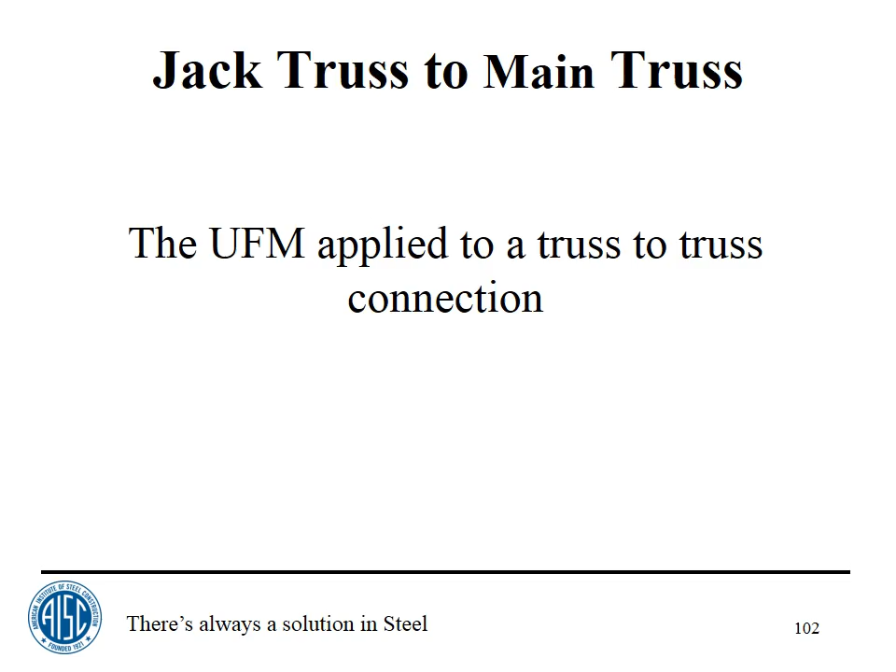A jack truss to a main truss. Now you might say, wait a minute, this is not a bracing connection. It is—I showed you the next slide last week. This is really a bracing connection.

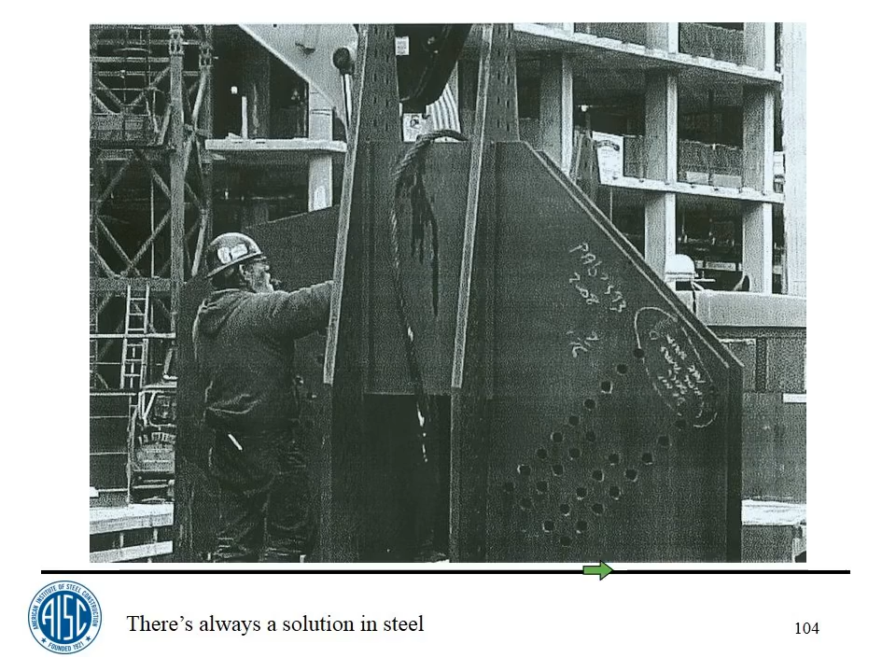The next slide shows the connection between a main truss and a jack truss, not the exact one we were looking at in the previous slide. I wanted to point out that we're slotting this near side gusset and passing the jack truss gusset through it to the inside of the far side main truss gusset. The reason we're doing that is to get the vertical component of this jack truss brace, which was probably on the order of 2,000 kips, right dead center on the truss, main truss vertical.

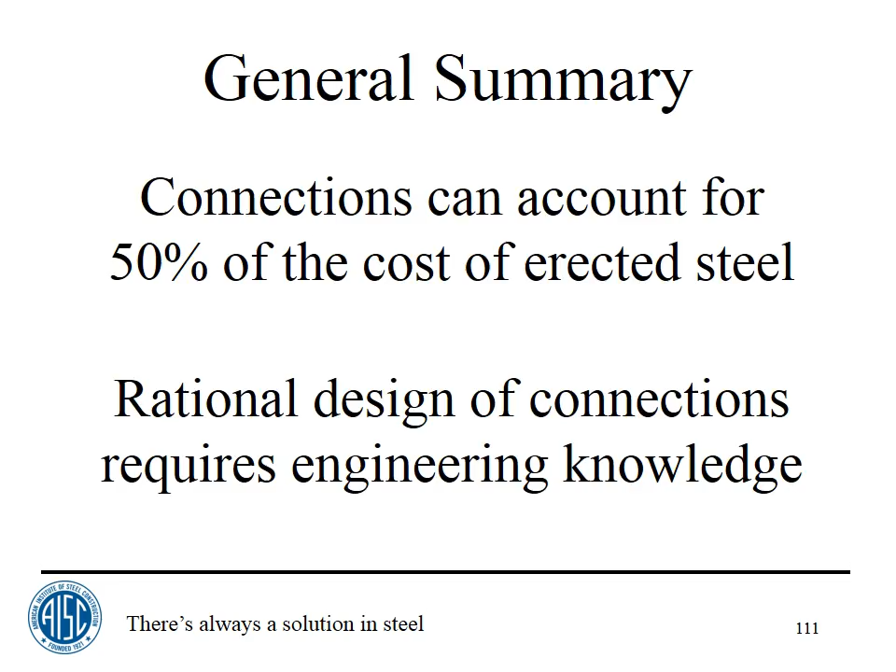So the uniform force method is a rational method. The KISS method is fine too, if you want to use it. So is the parallel force method. But I don't think they give you as good a design as the uniform force method does. As good in the sense that it satisfies equilibrium, and it's very economic, and it's probably closest to the true internal solution.

In the context of the corollary to the lower bound theorem, it provides a design closer to the actual unknown admissible internal force distribution than any other known method, and you saw that last time. And it provides pretty economical connections when properly used.

The geometry and loads determine whether to use the general UFM, which was really the first example that we did, or special cases 1, 2, and 3, which we have not done any examples for yet, or special case 4, which was the one we did with the jack truss. And I think that brings me to the end of this.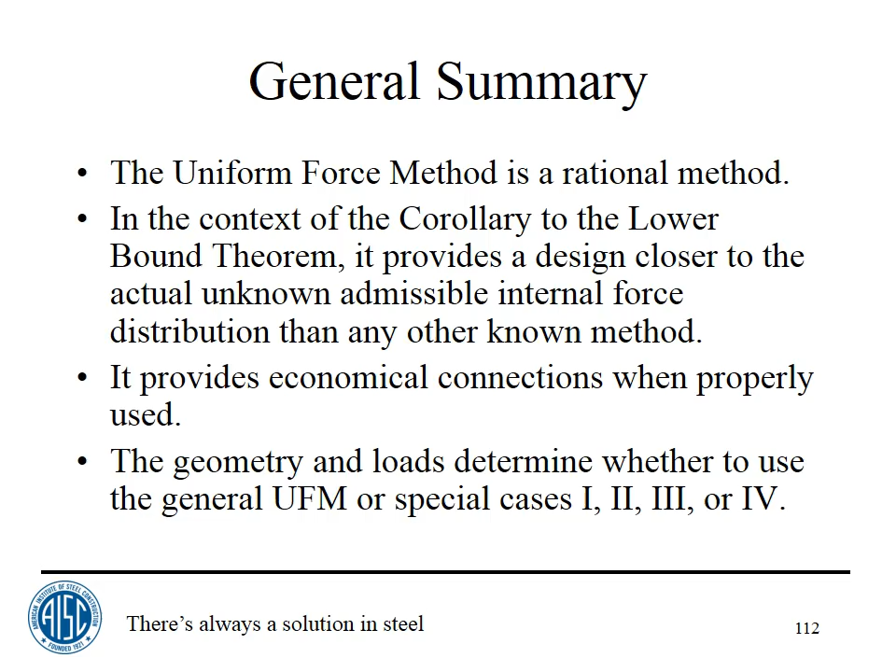This reference 1 here is the one that's got the non-orthogonal uniform force method developed in it. That's the second edition; the first edition is about 1999, it's got the same stuff in it. That particular book applies it to an aircraft hangar top chord with a sloping top chord, and gives a pretty neat design, I think, compared to what was originally done using a version of the KISS method.

Anyway, there's a couple of references here that have some chapters where I'm either author or co-author, that you can look at and see. Maybe you can get some more information on this stuff if you're interested. And I guess that brings us to the end, and we're right about on time, Brent. So I hand it back to you.

Okay, thank you, Bill. We do have a handful of questions here. The first question I have for you is, how do you account for the beam reaction due to gravity loads on the beam in addition to the vertical component of the brace force?

In the usual situation, we assume that the gravity force applies to, say, a column. If we're talking about a column flange connection, we apply it at the face of the flange, and we don't try to get it to the center of the column. The logic there would be, if you didn't have a bracing connection, you would apply that force at the flange and not concern yourself about it. Another part of that is that programs like Ram Steel actually assume an eccentricity there anyway in the design of the column. But we do not explicitly bring that shear to the center of the column as we do the vertical component of the brace.

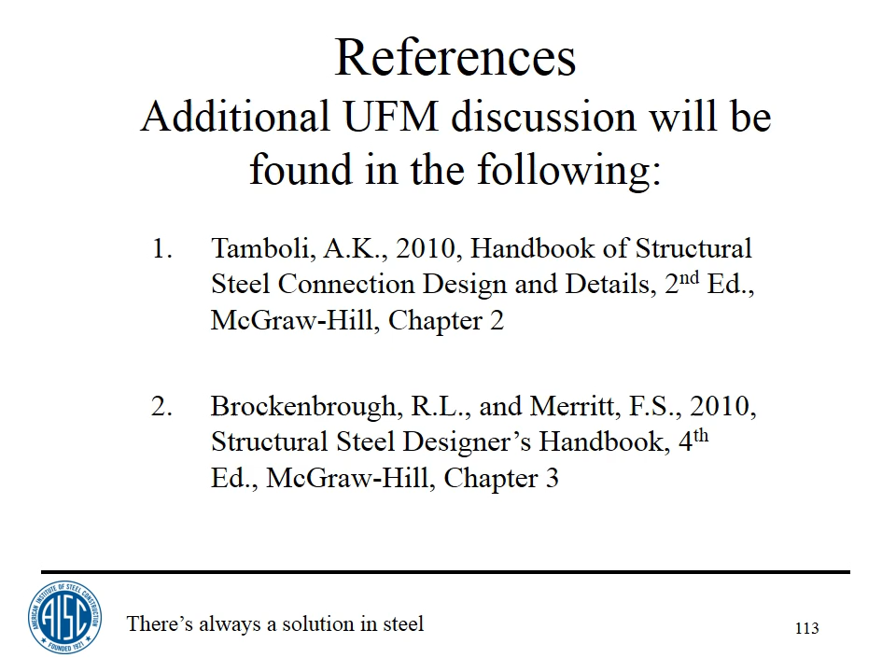If you were going to a column web, it's there anyway. But if you use this E sub C not equal to 0, equal to 10 1/4 here, you need to bring the shear from 10 1/4 inches out, the beam shear, to the face of the column. And that's included if you go through the calculations I showed you for that particular example.

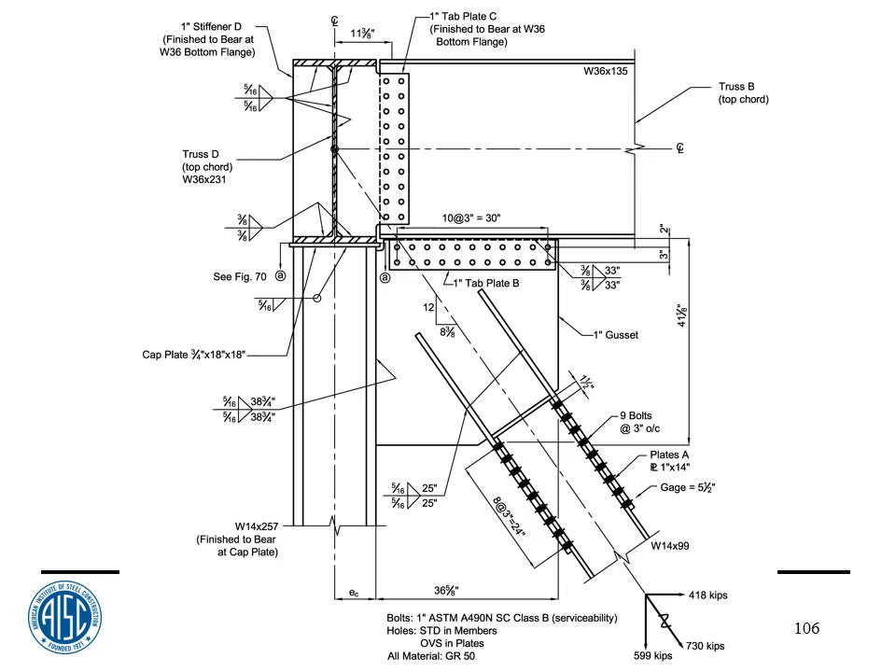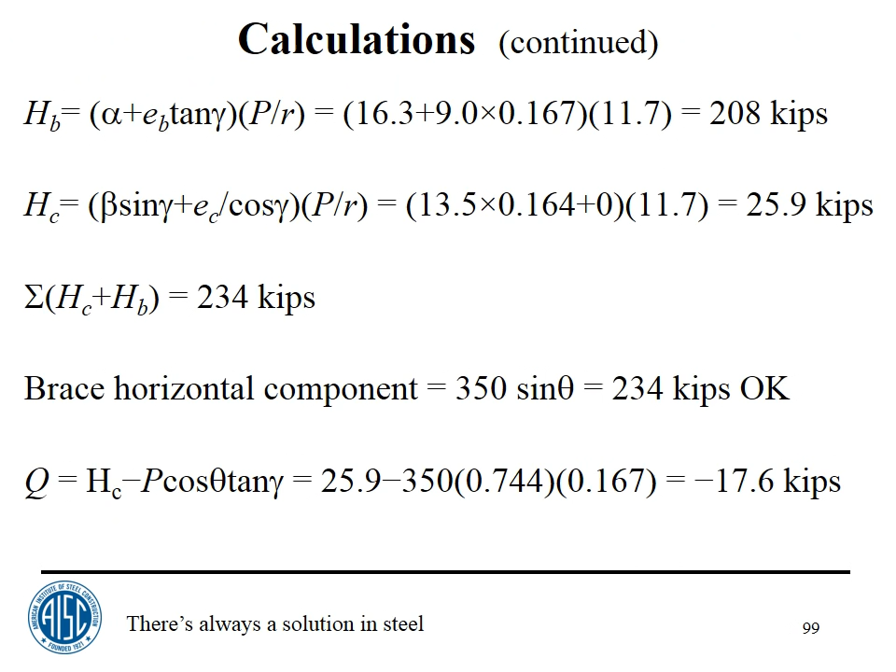I'm backing up, I don't remember what the number is, but it's back a few. If you look at the forces that we had in that particular connection, do you remember what the number is, Brent, so you can just go to it? Instead of me backing up, I'm looking for it. Which one are you talking about? The first example? No, it's the special case 4 example. Okay, hold on, Bill, stop. I'm almost there anyway, but maybe you'll get there before me. Bill, I'll get there, want me to stop? Yep, okay.

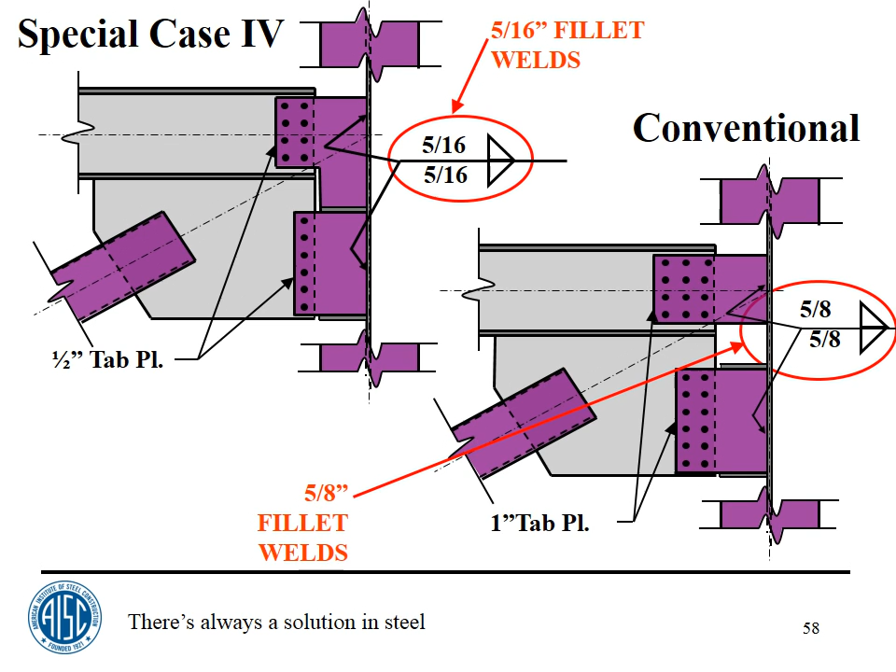If you look at this distribution where I give you the numbers... where do I give you the numbers? Come on. Yeah, no, that's not it. I think it's the next one.

Yeah, this one. That couple you see, the 275 kip-inches on the bolts, is based on two things. It's based on the 46.6 times 1.5 inches, which gets me from where I'm assuming E sub C is, and it's also the 20 kips times the distance out to the centroid of that bolt group, which is 10.25 plus another 1.5 inches, I think it's 11.75. That 275 kip-inches gets my 20 kips shear all the way back to the column.

And you see on the column I got 40. The 46.6 actually includes that. If you look at this free-body diagram, you see 26.6 here, but you see 46.6 here because that's including the 20. And that 46.6 is carried into the bolt group.

It's carried through all the way to the face of the column web. So what we're doing generally, if we go to a column web, we get the shear to the column web because the strength of the column, the flexural strength about the weak axis, is generally like a third or so of what it is about the major axis. But it's always been AISC's policy that beam shears to column flanges

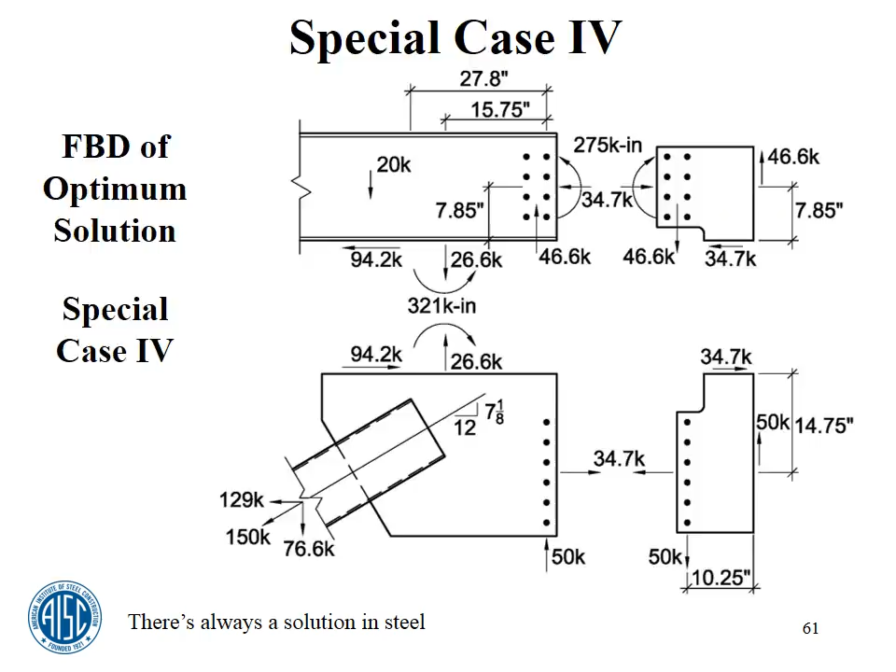I mean, it's been done right here for a web connection, which really was treated like a flange connection. I can do it to any connection I want, if that's what you want to do. It's going to give you extra forces to deal with. I did not consider that in any of these connections where I'm going to a column flange. We did not consider it in the first example that we did, and we didn't consider it in the jack truss example.

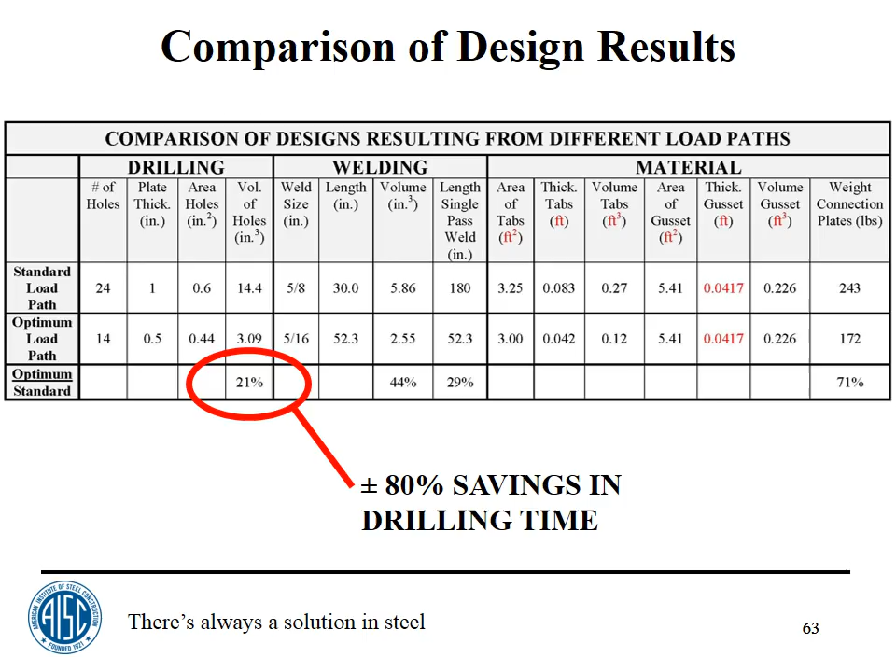Okay, next. Okay, I'm going to take us back to special case, well, I guess case 1. It's not special case, actually, I'm sorry. Yeah, special case 1. Slide 36, right. Okay, so the question is this.

Should special case 1 be avoided if doing a delegated connection design and not having input on the framing member sizes? In other words, if I'm not the EOR and didn't size the framing members, would I be introducing moments into the framing that was not accounted for in the original EOR design? I'd say the answer to that is, I think, yes.

I would not use this unless the engineer of record told me that he wants his work point at some oddball place. And we've had jobs where they put it right here at the center of the column at the top flange of the beam. We've had others where they put it at the corner of the gusset.

If that's what you want, I will do the calculations the way that you see here, and then I will tell you that you've got couples in your beam and your column. If I assume an elastic analysis that this is what they are, I calculate the eta factor that way, and

you tell me whether it's okay or not. But no, I can't use this unless I actually designed the main frame. But if the engineer tells me that's what he wants, I might assume that he's taking care of it. But I think I would show the couples just to make sure that he knows what he's getting himself into

here. Last week I said that when people were using the KISS method in years past, and I know this because I've talked to people from American Bridge and Bethlehem Fabrication, they didn't do any of this fancy stuff. But you can't get away with that today. If you don't do it, somebody's going to call you on it. And I think you need to have an admissible internal force field. You need to satisfy the niceties of structural mechanics, except for a few cases where AISC has traditionally not done it.

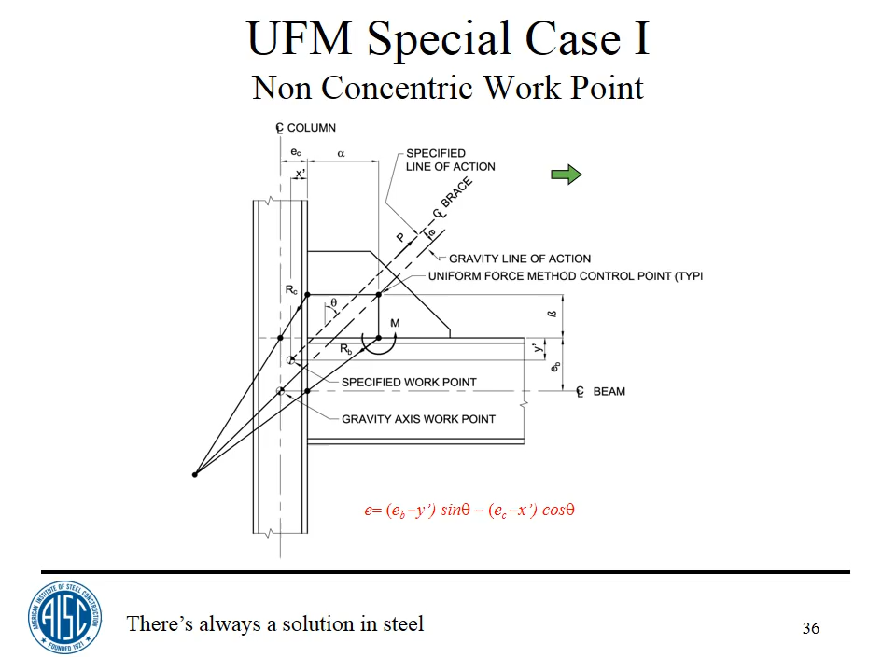Okay, the next question is in regards to special case 3. Let me get there one second. Okay, the question is this regarding special case 3.

The AISC examples found online using special case 3 refer to the moment M sub BC as negligible. As the connection engineer, is it okay to ignore such a moment when designing a bracing connection? Well, I don't think it's negligible. I don't know—if the vertical component is pretty small and you have a small column, but really, you've got a small connection. Maybe if you've got a small column and a deep beam so you can get lots of bolts in there, maybe it is negligible, but I would not say that it's negligible.

And I said that in my presentation, that one of the problems with this is that you've got that couple. I would not ignore it. I would not ignore that couple.

On the other hand, I am ignoring a couple, if you like, because I'm delivering R to the flange, and I'm not worried about half the beam depth or half the column depth in that case. But that's only because it's been done that way for years. Not that it's right, but it seems to work okay.

Also, as I said, programs like RAM Steel actually do include an eccentricity in your column design for beam shear connections to column flanges. There's a discussion of this in the manual—there has been, I think, since the 2nd edition LRFD, about why it probably doesn't matter. I don't want to get into that, but I think it's in Part 9 or Part 10, where we talk about connection rigidity and whether or not you really need to consider the fact that you may have a rigid moment here or a simple connection here.

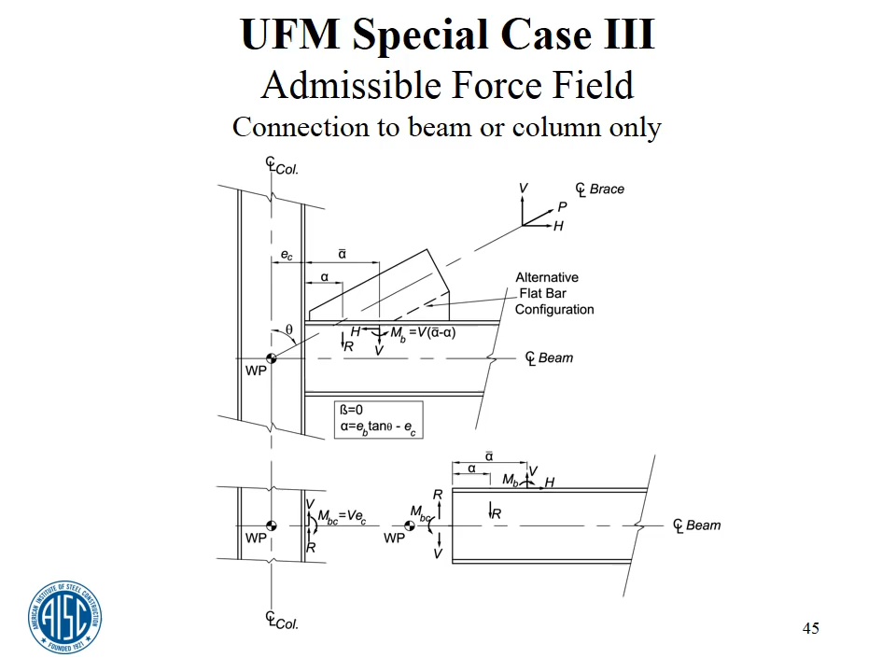Okay, I'm going back to the jack truss example. I'm on slide 109. Got it. The question is, what is the basis for the control points A and B on this slide? How did you determine these control points? Control point A is at the gravity axis of the beam, which is the jack truss top chord in this case, and it's at the position of where, if you imagine extending the column flange—where my green arrow is—extending it up until I reach the center of the beam, that's the point. That's the definition of control point A.

So I know exactly where that point is. I know the size of this column down here, which is the truss vertical. I know the distance from the center to the flange. So I know the distance exactly to that point from a reference point of the center of the column. And I know exactly its distance from the bottom flange of the beam, because it's right at the gravity axis of the beam. I had another slide following this—it's this point right here, at the half depth of the beam at the face of the column flange. It's this point right here where my green arrow is. You know exactly where that is.

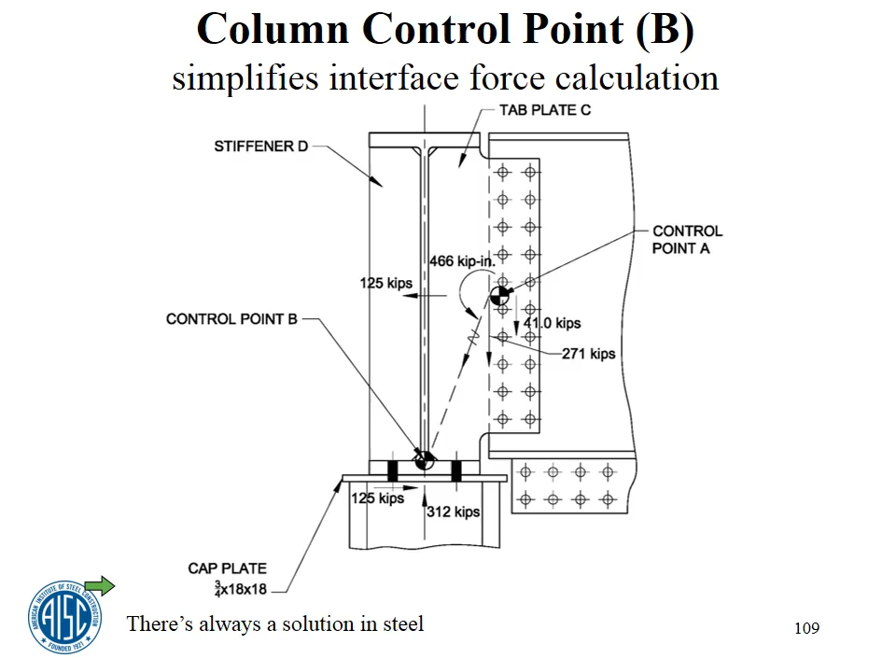All right, here's the overall picture for special case 2. How does special case 2 impact the forces at the control points?

How does special case 2 impact the forces at the control points? Well, control point A is this point right here. That was at the beam to column connection, right? I can't remember which is A and B, but I think that's A. That's one of the two control points. And how does it affect it?

I've got R, and I've got V sub B, and I've got delta V sub B. So I've got R, plus V sub B minus delta V sub B as the shear, and I've got H sub C as the axial, or the horizontal, or the normal force on that connection.

And this point, the other control point, is really not shown in this picture, is it? It's not that point, it's this one right here. Where is that? That point isn't really shown in here, but it's right here. It doesn't have any effect on this point. I don't know why I keep getting an arrow stuck there.

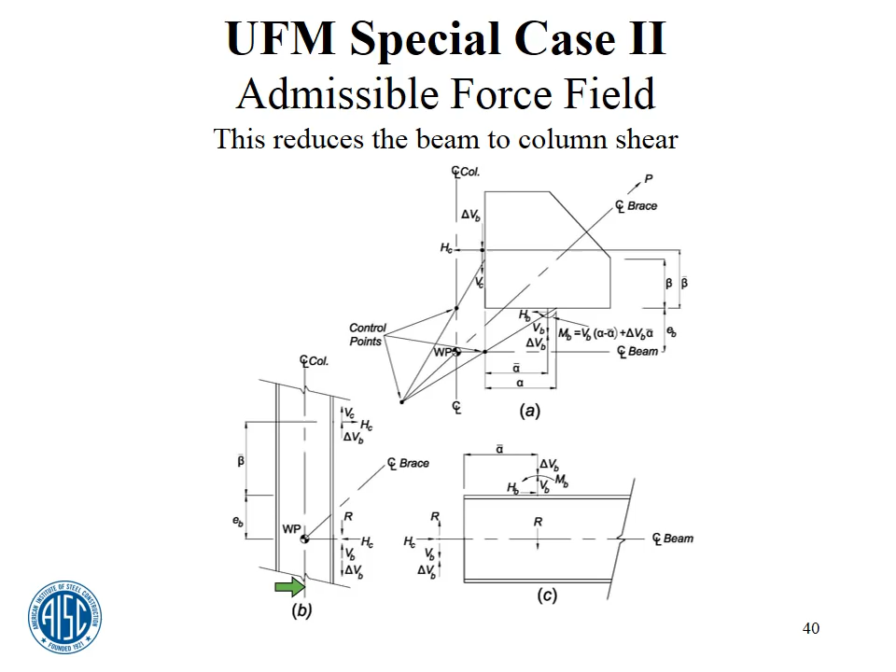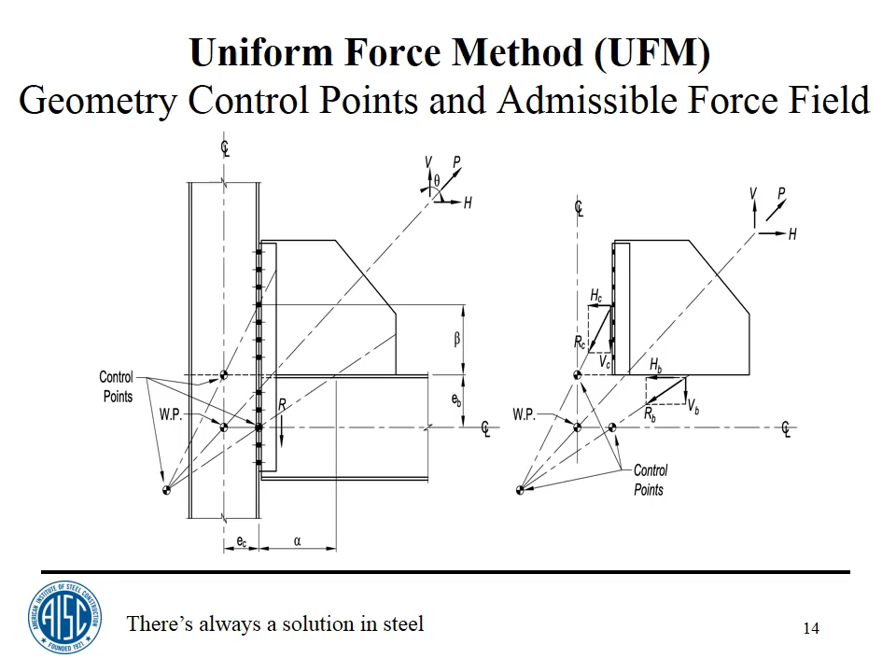Okay, next. Okay, I'm going to slide back to... I think I want to be here, slide 14. I think this will be the right one, but for the... actually, let's go here. I'm not sure it's going to work either.

Shoot. Okay, so for the calculation of R, here's the question. Does beta or alpha have to equal their bar equivalent? Can R just be calculated with beta and alpha?

Alpha and beta must satisfy this constraint. Any alpha and beta that satisfy that constraint can be used in this formula R. So if I have alpha equals alpha bar, which is the ideal case, and beta equals beta bar, then I've got alpha and beta that satisfy this constraint.

A lot of times, and you saw in the example problem, the first one, that we took beta equal to beta bar, which I think was 8.5, and alpha turned out to be... what was it? 11.5, but alpha bar was 10.5. I have to use the 11.5 in this formula.

So I'm not sure I understand the question, but whatever alpha and beta you use, they need to satisfy this constraint, which is the formula in the box. I can choose a beta and calculate an alpha and substitute that in here, or choose an alpha and calculate a beta and substitute that in here. I could have an alpha and a beta that satisfy the constraint because I picked them to satisfy it in advance. But whatever I pick, alpha and beta must satisfy this equation in the box.